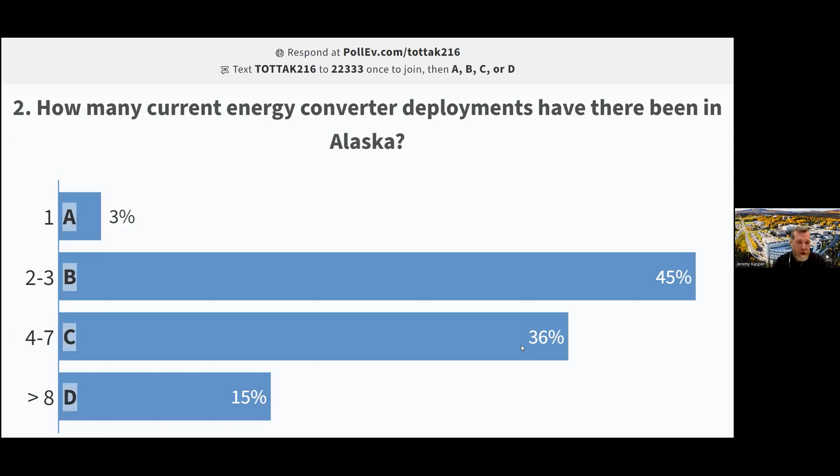In this panel, we'll hear about the resource in Cook Inlet, which is kind of the big elephant in the room, and what some of the challenges are. We'll learn about upcoming technologies that UAF is working on along with our partners in the private sector, and hear about how to potentially assess the suitability of sites on the Kuskokwim River using pretty limited information. As a reminder, during the session, questions can be submitted via the chat box, and we'll address those as best we can during the Q&A following the panel.

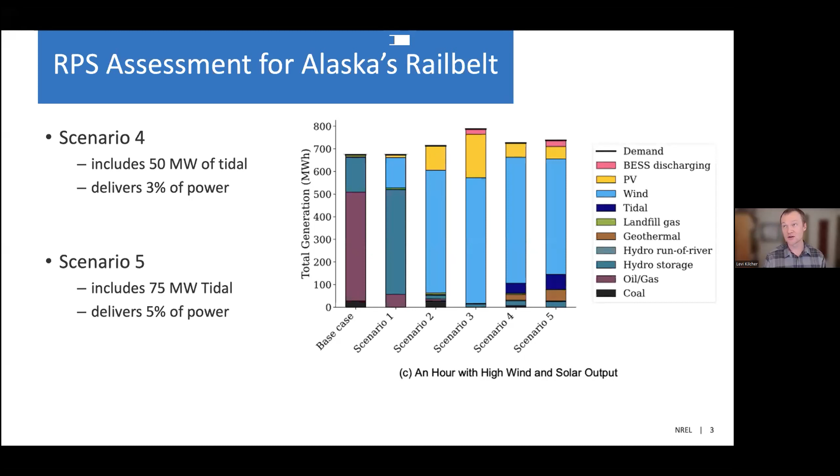They send out acoustic pings and they listen for the Doppler shift, the echo off of particles in the water column. Based on the shift in the frequency that these things hear, they're able to measure the velocity of the water throughout the water column. They're totally cool things. I could go on and on about them, but basically these are the instruments that allow us to measure the velocity in the water column.

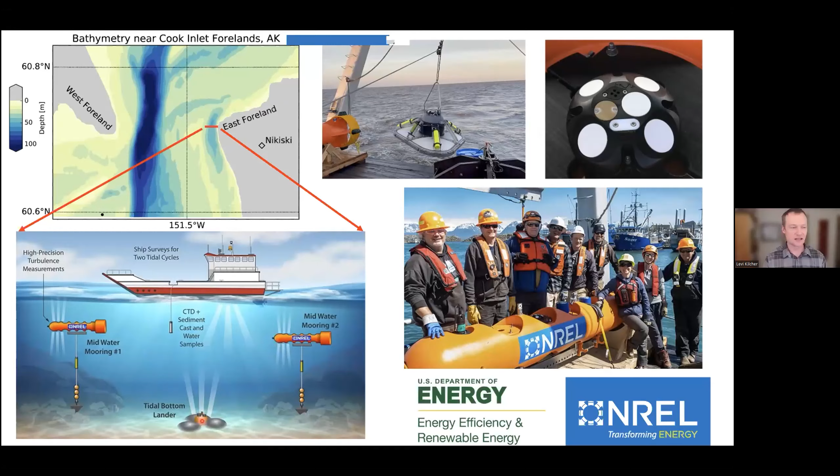So here's just a really quick overview of the data that we collected. The plot in the upper left indicates the depth average currents, indicated by those red arrows.

So this is basically during peak flood, and you're seeing currents between 2 and 3 meters per second flooding to the north. The orange dots indicate the location of the moorings, and the green triangle is the bottom lander. The bottom panel shows you the vertical structure of the currents across that channel. Red and dark red indicates strong currents to the north.

The Q is a volume flux estimate, so that's like the total volume of water that's moving through here. That's really important for calculating total power that you could generate at this site. And then the tidal amplitude plot is there. The blue line shows when we made these measurements.

So this transect was made just a little bit before high tide. That's when the peak flood currents occur. And then as we step forward in time to the next transect, we're a little bit just almost on top of high tide. You see the currents are weakening a little bit.

And then as you step forward in time again, the currents are becoming much weaker just a little bit after high tide. About 40 minutes after high tide is when we actually see the slack current condition. Stepping forward again, now the currents are starting to reverse to the south, starting to ebb out of the inlet. And then a little bit as you approach low tide, you see the peak ebb currents.

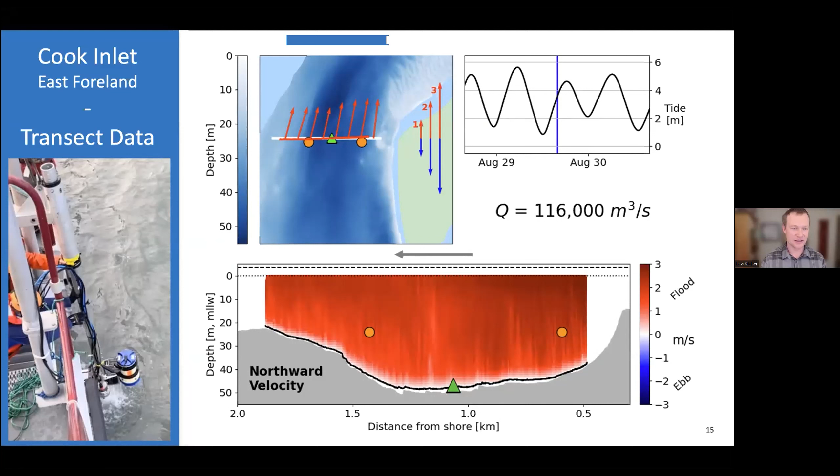These volume fluxes, these 3 meter per second currents that we're seeing are really premium tidal energy resource. So basically we are seeing the really energetic resource that we had hoped and expected to see at this site, and I think it's really promising for tidal energy development at this site.

This panel shows the data that we got off of the bottom lander. The top panel shows the tidal elevation, and you can see we have 2 months of data. This is just a totally phenomenal data set. The currents, especially during spring tides, are well over 3 meters per second.

And then the bottom panel shows some of the turbulence data that we were able to collect. Turbulence is really important for designing these turbines, because we learned in the wind industry that in the 90s especially, turbines were breaking down earlier than they had expected. And they figured out that turbulence, basically shaking the turbines, was causing those early failures. So they went through a process of redesigning them to make them more robust. We're working on leveraging that experience by measuring turbulence early on, so that we can give that to the technology developers, so they can design their technologies to account for turbulence, so we don't have to learn that lesson the hard way later on. That's a big piece of what we're doing here with these measurements.

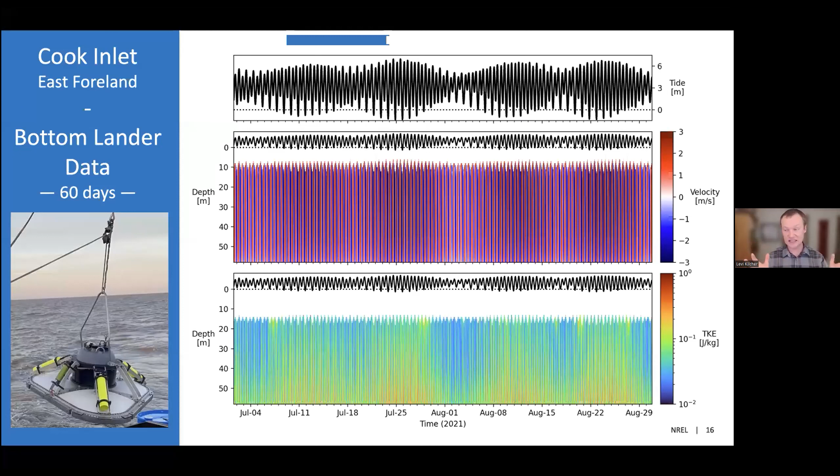And here's a zoom in. This 60-day view is kind of hard to actually see what's going on, so I'll zoom in here. We now have the depth averaged currents in this upper panel in red and blue. Again, you're seeing the depth average currents, especially during spring tides in the flood direction, over 3 meters per second. You can see the vertical structure of the currents here, and then the turbulence again on the bottom. Those turbulence levels, especially near the bottom, are really intense.

If we look at this in a depth averaged sense, sorry about that, in a time average sense for different levels of flood and ebb. Red lines are for flood, blue lines are for ebb, and these gray lighter lines are weaker current conditions. But basically what you see here is that the strongest flood currents are well over 3 meters per second, and the ebb currents are well over 2.5 meters per second, approaching 3 meters per second.

And then if you calculate that in terms of power, there's a cubic relationship between the power you get out of these currents and the current speed. So you see those strong floods really provide a lot of power. You're seeing almost 25 kilowatts per square meter of tidal energy flux at this site.

The last thing is this turbulence intensity plot. This is a metric that we use just as a basic understanding of turbulence at these sites. It's really low, especially above 20 meters from the bottom. So above 40 meters depth, the turbulence is all below 10%. That's really good—in the wind industry, they frequently see turbulence levels of 15%.

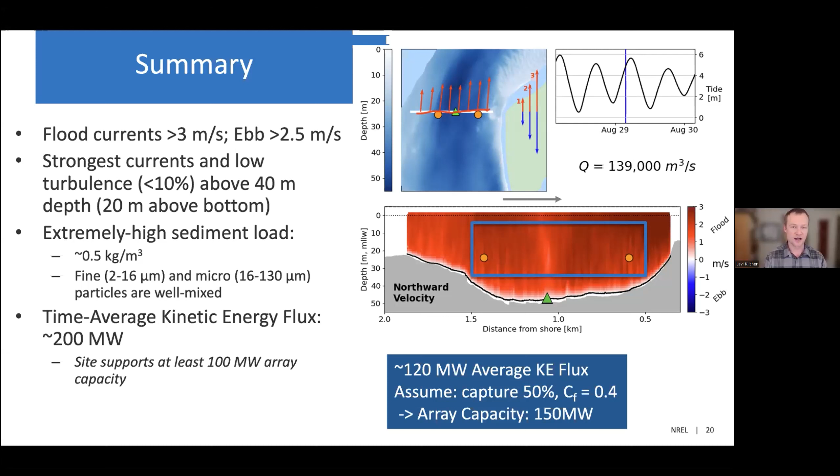And so as time goes on, the idea would be that you would actually build it out over there.

I just wanted to make one comment here on how long it takes for these technologies to become commercial. It took the wind energy industry 30 years to get from some of the early days in the 80s to where they are now. I guess it's been 40 years now. But you started to see those commercial projects in the early 2000s.

I don't want to speculate too much on where we're at, but I think, in my opinion, we're still on the left half of this plot. So we've still got 5 to 10 years at least before you see tidal energy projects delivering power competitive with other forms of generation. And a lot of that, in my opinion, has to do with demonstrating that the technologies can operate reliably for long periods of time, and also just doing the R&D that drives the costs of these technologies down.

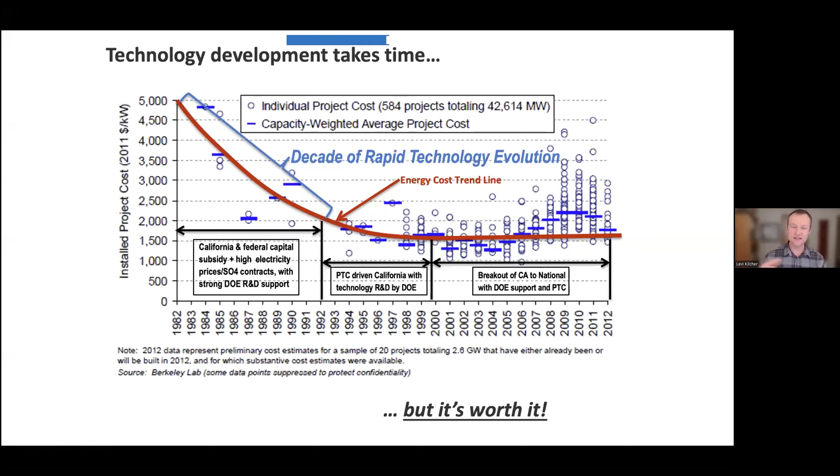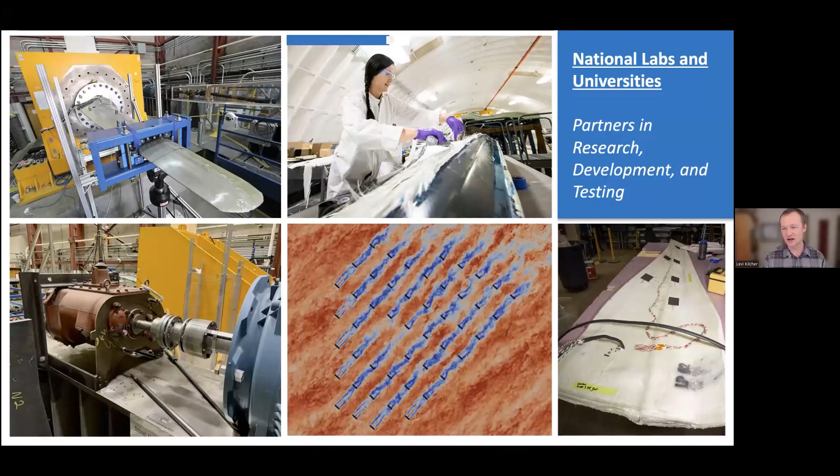One thing I think is really important as you're doing that is to involve the research community, because from what I've seen, any project developer is often so focused on getting their project in the water and making sure it's online and working, that sometimes they overlook collecting all the data that's necessary, whether that's environmental monitoring data or mechanical engineering or electrical engineering data that's needed to accelerate the technology development and the R&D pipeline. I think the labs and universities are great partners to support that work.

So that's all I've got. Thanks for your time, and I'm looking forward to hearing from the rest of the panel.

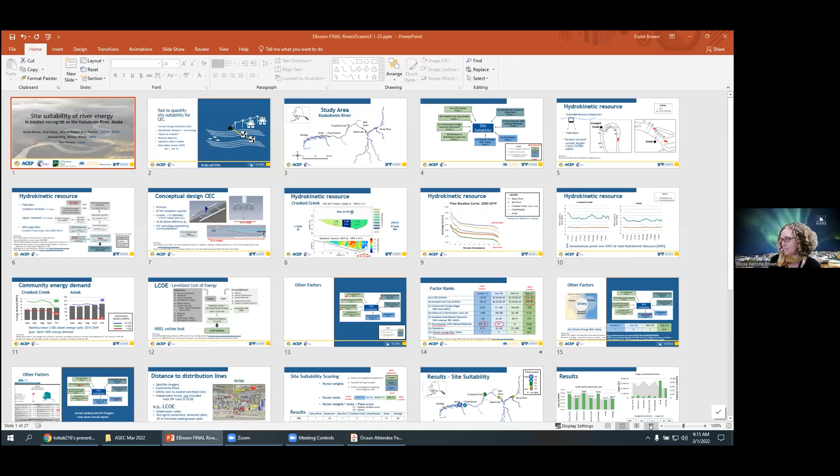Today I will present our recent work on site suitability of river energy in isolated microgrids on the Kuskokwim River, Alaska. This is a collaborative project with authors from the Alaska Center for Energy and Power at the Pacific Marine Energy Center at UAF, Alaska Pacific University, and the University of Alaska Anchorage.

The idea for this project came from Melanie Wilson, who did her master's project at APU, and several of us were on her committee. We incorporated field measurements that were part of a statewide resource assessment of hydrokinetic river energy resources by Tom Ravens to come up with a tool to quantify site suitability for current energy converters, or CEC. Thank you, Jeremy, for explaining that already.

So on the one hand, we looked at the hydrokinetic resource—how much river energy is there. But then what other factors are there to consider? There are social, environmental, and economic constraints, and that's what's meant by practical resource. We addressed some of those and applied our method to sites in Alaska.

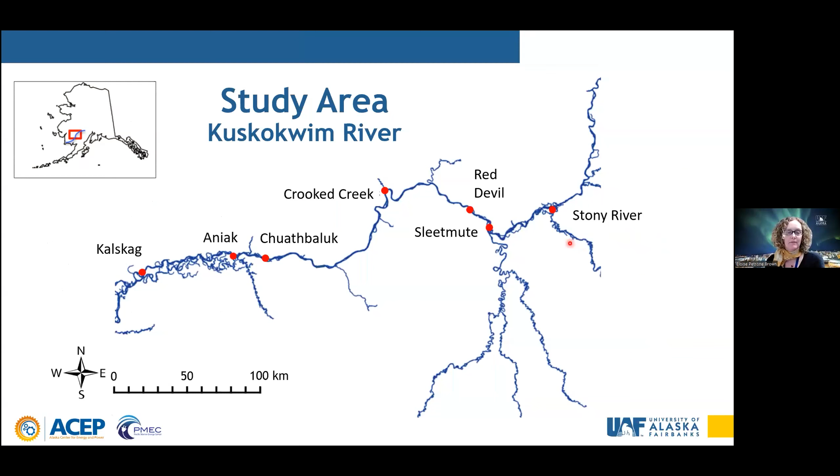This is our study area on the Kuskokwim River, in southwestern Alaska, and the 7 communities we selected. The furthest upstream was Stony River, and the furthest downstream was Kalskag.

As part of a statewide resource assessment, transects were surveyed at all of our locations, and thanks to Levi for explaining how ADCPs work. Basically, a transect is like a cross section of the river. It lets you see what the flow looks like—it's a snapshot in time at that one moment.

There were multiple transects at each site surveyed with ADCPs. As part of this study, you can also see our recommended location for a current energy converter at each site—that's what the blue star is. I'm showing a couple examples from Crooked Creek and Aniak. We have a fair amount of data, so I'm going to highlight just a few examples rather than go into everything given the time we have today.

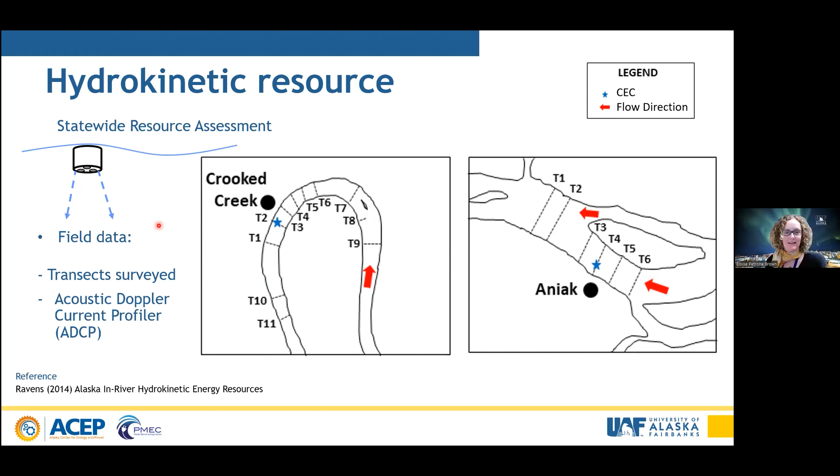Now, this slide I put up for the engineers in the audience. I'm not going to go into great detail on the equations. The short version you need to understand is that there are 3 main time periods.

The field data—the transects and the physical measurements of channel geometry—where snapshots in time were taken over the space of a day or two. Also part of the field data, hobo pressure sensors were deployed for anywhere from 2 to 8 weeks, depending on the location. So we captured discharge over one summer during that part of the field work.

The third time frame is the USGS gauge maintained at Crooked Creek. We were able to get 20 years of data, and relate that back by inputting our discharge from the transects and our longer-term discharge from the pressure sensors. We were able to back out what a typical open water season looks like over 20 years at each of the sites. So we start with discharge, convert it to velocity, and the end goal is to back out power.

That is how we calculate our hydrokinetic resource over the whole open water season, in megawatt hours over 4.5 months. The only other thing I want to mention is Manning's roughness—that's a way of describing the friction the water feels at the bottom of the river. We were able to tune our HEC-RAS model for each site.

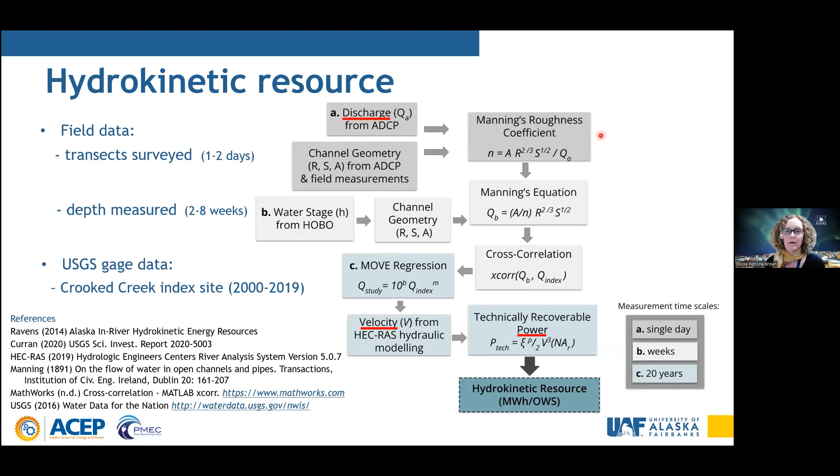Let me show you what that looks like in a second.

In order to be able to back out power, we had to choose a current energy converter, because you need these parameters to go into the equation for technically recoverable power. So we chose this conceptual design current energy converter that Previsic described in his 2008 EPRI report.

It's a floating style current energy converter. It's on pontoons. It's got a 47 kilowatt nameplate capacity, and it has 4 rotors with 2 meter diameter, each with a swept area of 3.14 meters squared. Its device efficiency is 34.4%. Those are the 3 parameters you need in this equation in order to back out power, and those numbers have to come from a manufacturer.

This one is 10 meters wide and 50 meters in length, and that goes all the way to the tip of the mooring. We recognize this is a conceptual design current energy converter, and that technology is approaching commercialization. So it was our intention that our methodology was transparent enough that a community could use their own cost data or manufacturer, or even their own weighting, to figure out what might work in their situation.

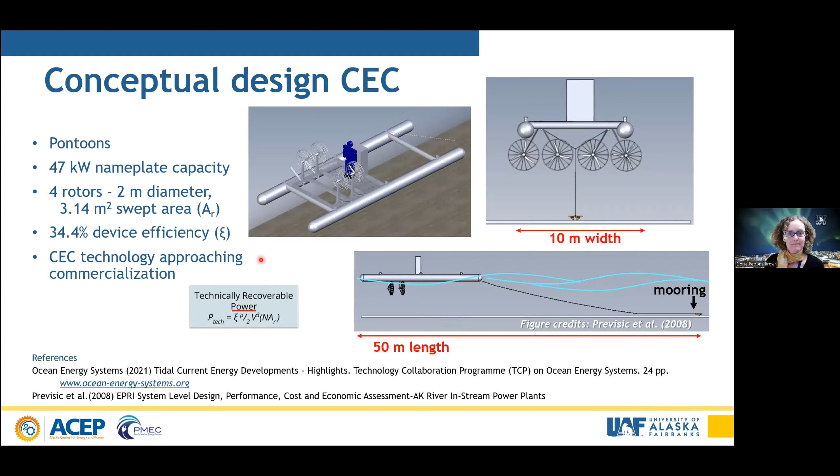Here's an example of what our transect data look like. At the bottom plot, you have your measured transect. This is a cross section of the river, just to orient yourself. If you're looking downstream, right bank is to the northwest on your right, and left bank is towards the southeast.

So town is on the right bank here, and flow is going into the page, towards the southwest. This is at Crooked Creek. One interesting thing I wanted to point out is that this is one of the towns where the channel is on the same side as town. When I get into the cabling distances later, that's important—it's going to bring their costs down a lot.

On the lower plot, you have flow speed in meters per second against the depth of the transect, and the same on the upper plot. This shows that the measured transect matches very well with our model transect, which means we were happy with how we had tuned our HEC-RAS model for the future models.

The other interesting thing in this plot is you can see the center channel has 2 meters per second velocity, and it's not exactly in the deepest part of the channel, which is called the Thalweg. I'm bringing this up because we need to recognize that these braided riverbeds do migrate—the channels don't always stay the same. So it's likely that the location of the current energy converter might change from year to year slightly as the channel is adjusted.

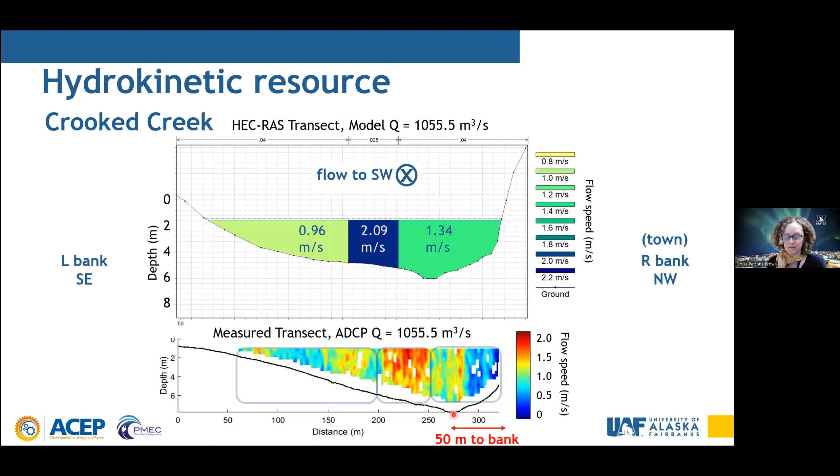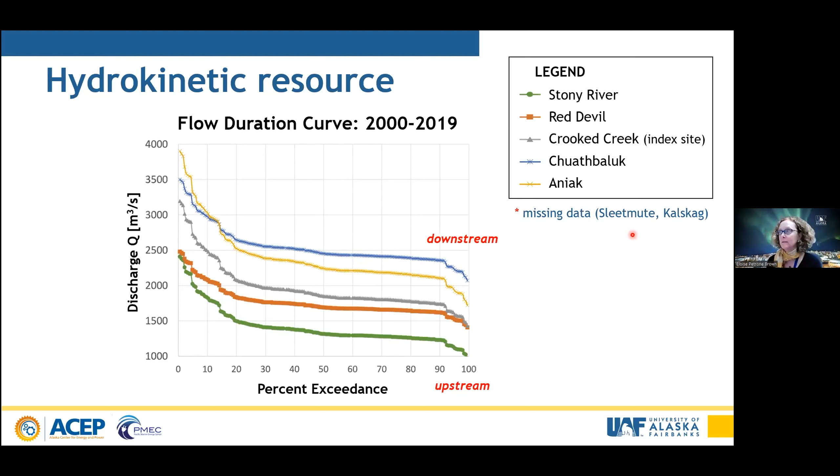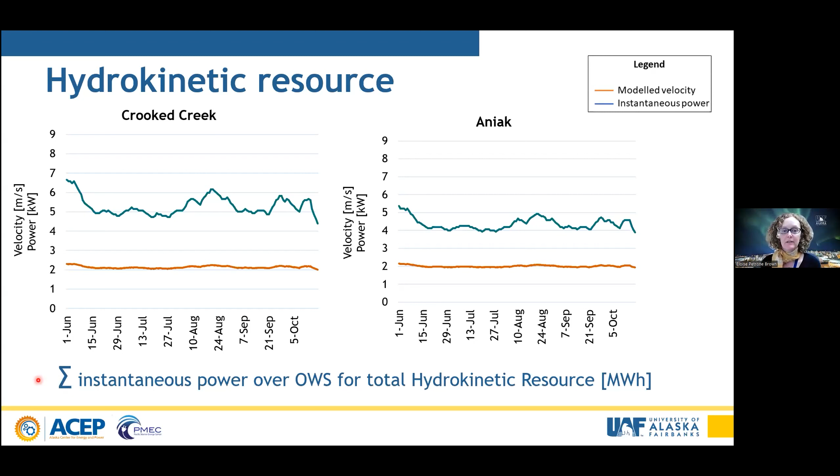This is what the time series of velocity, modeled velocity, and instantaneous power look like. The orange line is modeled velocity in meters per second, and the blue line is instantaneous power in kilowatts. This is over the open water season from June 1st to mid-October at 2 sites, for example at Crooked Creek and Aniak. What we did with this instantaneous power was sum it over the entire open water season to obtain the total hydrokinetic resource.

Once we have the total hydrokinetic resource, we can start looking at community energy demand and figuring out how many current energy converters would be needed at each location.

What you're looking at here, the gray bars are the monthly mean plus standard deviation of diesel energy used for the 5 years prior to the present. This is energy demand in megawatt hours for the 5 months of the open water season at Crooked Creek and at Aniak. I wanted to point out the y-axis scales are orders of magnitude different: Crooked Creek only goes up to 35 megawatt hours, but Aniak is a much larger community, so its scale goes up to 300 megawatt hours.

What this shows is that one current energy converter at Crooked Creek is able to meet 72% of the demand during the summer months. Since our goal was to meet 100% of the energy demand at each community, at this site we recommended 2 current energy converters, which would produce 145% of the current demand.

Aniak, which is a larger community, we found that 1 current energy converter would only meet about 6% of the community's demand. To meet 100%, or actually 98% was the closest we could get, at this site we would recommend an array of current energy converters with 4 different moorings and 4 current energy converters on each, for a total of 16 current energy converters.

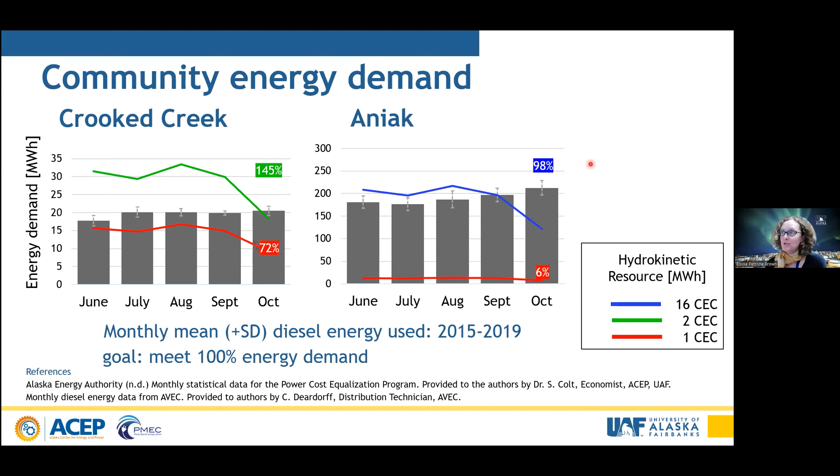So that's what we did at each site to figure out the number of current energy converters required. Once we knew how many were required, we could start looking at costs. To calculate the levelized cost of energy, we used the National Renewable Energy Laboratory online tool.

The website is here, it's really easy to use, and we spent quite a bit of time looking at the different costs. So let me change... oops, I'm having a hard time, I lost my mouse. Okay.

Looking at the capital costs on the upper left, this first section associated with manufacturing came directly out of the Previsic EPRI report from 2008, which we converted to current currency. The next part of the capital costs, the debris diverter and on-site assembly, those costs we got from our experiences at the Tanana River test site operated by UAF.

I wanted to point out that our capital costs did include the cost of a debris diverter—I won't go into great detail since Ben should have slides explaining that in his next talk. I also contacted many different manufacturers to get quotes for shipping, airfare, and the various underwater and underground cabling and connection costs that go into microgrid connection.

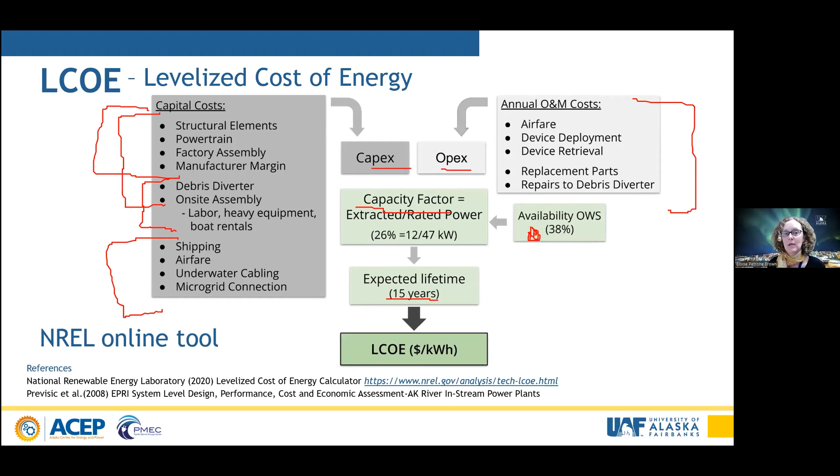Okay, let me go back to my laser pointer. So we've looked at the LCOE, the hydrokinetic resource, and the community energy demand. Now I'm going to explain some of the other factors.

If you recall, let me go back a slide—the factors were weighted by importance, weighted with a 1, 2, or 3. Within factors, we also ranked them from high to lowest, where a score of 1 is the least suitable and a score of 4 is the most suitable. I just wanted to point out a couple examples.

For the LCOE, a site where the cost is low, so less than 30 cents per kilowatt hour, is where we're saying would be a suitable location. And a place where fuel is high, so greater than 50 cents, is also suitable, because if the fuel cost is already cheap, it doesn't make sense to replace it with an LCOE of renewable that's the same or more expensive.

I think I have an animation here. There it is. I also wanted to highlight, for the sensitive environmental considerations, we looked at locations where there's fish spawning or rearing habitat or wetlands. Anywhere with fish habitat was considered least suitable, and combined fish and wetland got the lowest score, whereas if there were no sensitive environments, they got the highest score. We used data from ADF&G and US Fish and Wildlife Service to obtain that environmental data.

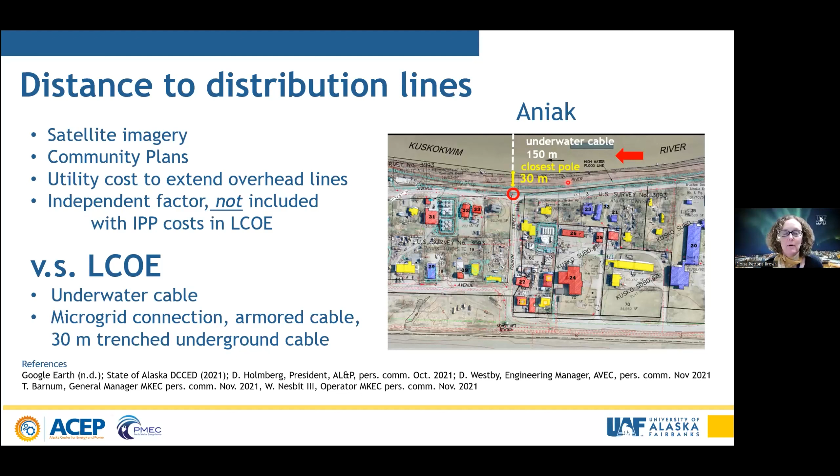I also wanted to show that the underwater cable distance was measured. Even though it's a separate factor not included in the LCOE, these cable costs, both the distribution lines and the underwater cable, ended up being fairly significant, and I think that contributed to how our results weighted out. The LCOE included both the cost of the underwater cable, calculated per meter, and the microgrid connection. We didn't distinguish for all of our sites; across the board, we took 30 meters as a combination of armored cable and buried underground cable in a trench. So this site essentially has zero distance, because that 30 meters to the closest pole is incorporated into our microgrid connection costs.

So if you remember our site suitability scoring, we take our factor weights weighted by importance from most important to least important, so the weights could be 1, 2, or 3. And then we took our factor ranks from least to most suitable, so for the ranks you could get a 1 to 4, and then we multiplied the factor weights by the ranks to get our final score. The total possible score was 72, and the lowest possible score was 18. Our final scores all ranged between about 40 and 50.

Our LCOE ranged from about 30 to 50 cents per kilowatt hour. And then here we have the number of current energy converters that we recommend. For most of the smaller communities with a lower energy demand, we recommended 1 or 2, and for the larger communities at Aniak and Kalskag, we recommended an array of multiple current energy converters.

I just want to point out on the slide, Sleetmute and Kalskag have missing hydrokinetic data, so take those two sites with a grain of salt. We are suggesting Sleetmute might use 2 current energy converters, purely based on the demand of the community since we don't have the hydro data. I wanted to still include an LCOE and look at the costs and distances for the site, but we don't have a final score for it. Same with Kalskag. Kalskag has about half the energy demand as Aniak, and that's why we recommended about half the number of current energy converters, but more data is needed to answer that for sure.

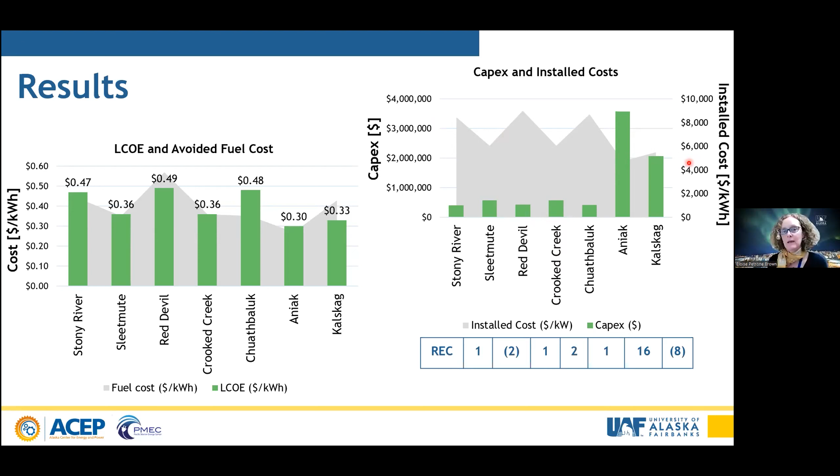So the other point I wanted to make on this figure was that although the initial investment was high, the installed cost, the cost per kilowatt, is reduced by the increased number of current energy converters.

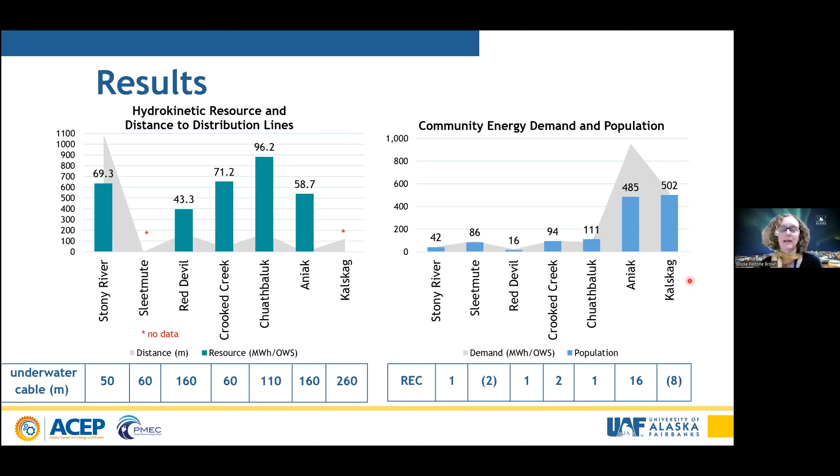So in conclusion, we presented a methodology to evaluate site suitability. We applied it to the Kuskokwim River. I think the LCOE results compared to avoided fuel costs show that current energy conversion is a potentially viable option at these communities. The main take-home message about our method is that it can be adjusted to suit your own needs. You could change the weighting or ranking of these factors if you felt we missed something, or that something was more important, and you could put in your own cost data into the LCOE to determine if your site is going to work or not.

A couple of things for future work we're looking at: some more targeted field data now that we've had a really detailed look at where the channels are relative to where the power infrastructure is. There's a few sites where we'd like to go back and do more targeted field data. We've also been in discussions with ORPC about looking at winter ice and under-ice flow measurements to try and get at that winter season.

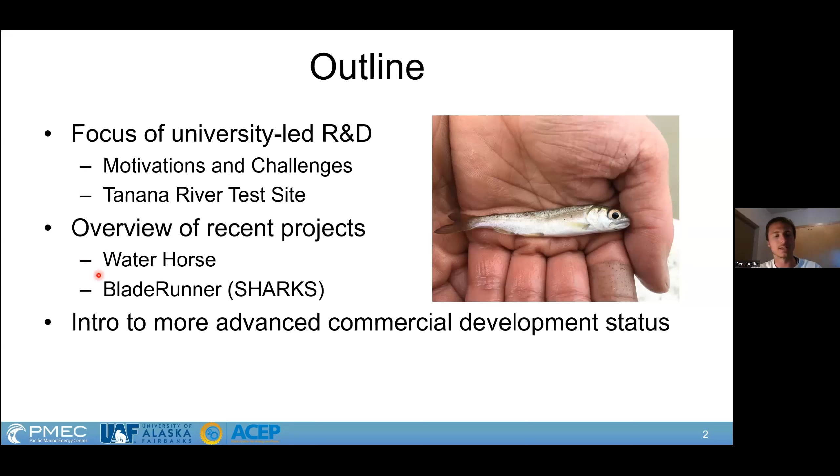In this presentation, I'll touch briefly on our focus as a university and our motivations for hydrokinetic research as it pertains to Alaska, what the motivations and challenges are there, and give an overview of our test site on the Tanana River. Then I'll talk about two of our recent projects that are sort of outliers in the field of technologies being developed. At the very end, I'll give a list of other technologies that interested folks might want to look into.

So, motivation: at ACEP, our motivation is really to try and advance hydrokinetic energy to the point where it's valuable to Alaskans and can provide power to Alaskan communities. Some of the challenges are that these devices are generally small scale, which means their cost per kilowatt tends to be higher. A lot of commercially developed systems are rated at say 3 meters per second, like Levi was saying, but we don't really have rivers that are 3 meters per second. Because it's a cubic relationship, you may only get 30% of the output of the device on an actual river.

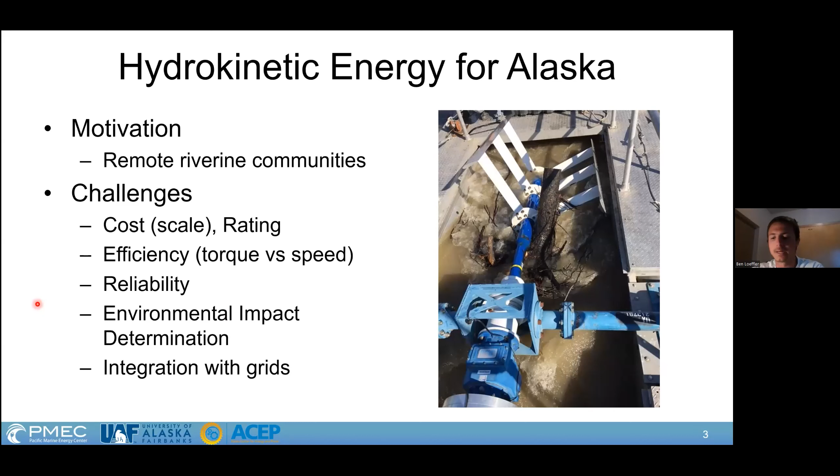So a little overview of our test site on the Tanana River in Nenana. It's about 55 miles southwest of Fairbanks along the Parks Highway, so it's pretty accessible, easy to get equipment in and out. We have open water May to October. The velocity has quite a large range on this stretch of the river—in the fall, if it hasn't been raining, we'll get down to 1.2, 1.3 meters per second. If we have high water, lots of rain and sun on the mountains and glaciers in June or July, we might get up to 3 meters per second.

Generally, we think of it as a 1.8 to 2 meter per second resource, which is consistent with what Eloise was showing for the Kuskokwim and similar for the Yukon as well. You can expect a depth of 6 meters, but obviously it changes with the river level and with the channel movements, and so 10 meters is certainly present in some places.

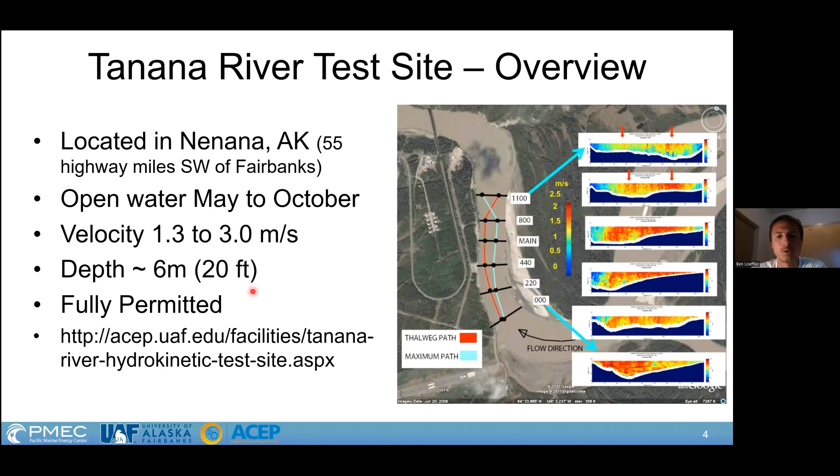This stretch of river is fully permitted, and we keep those permits current year to year, so it's pretty easy to get technology into the water on a fairly short timeline. There's no onerous permitting to speak of.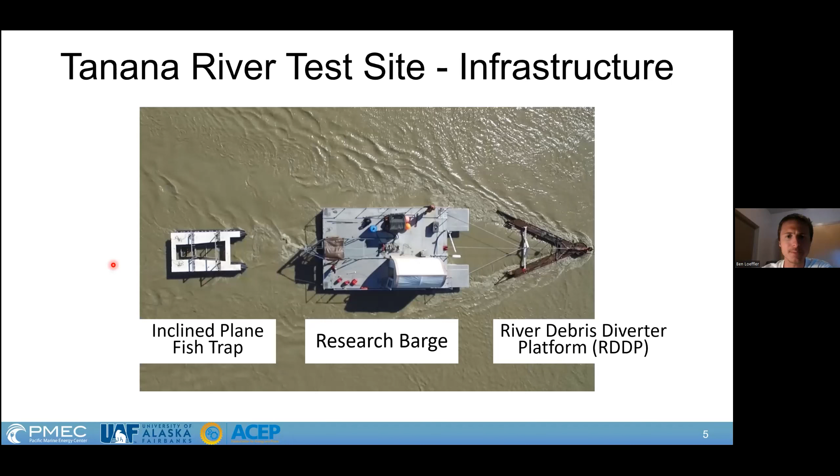Now we'll get into two particular systems that are kind of in the R&D phases that we've been working on here at ACEP. The first is called the Water Horse, and it's a galloping current energy system. Rather than rotating a turbine due to lift or drag on an airfoil, this system oscillates up and down, and I'll play a video.

These weird aluminum shapes on the left are called bluff bodies, and the flat face that's down on the deck is actually inserted perpendicular to the flow. So the river flows directly into the flat face, and then vortices trip over the upper and lower edges of this and create an alternating lift. This system is based on intellectual property from Renerge Incorporated.

We tested this first version in 2020, and then tested an updated system this past summer, 2021. The thinking with this approach is that these type of systems are expected to be very low efficiency compared to a turbine, but if they're a lot cheaper and more robust, that levelized cost of energy, LCOE, that Elle talked about, could be competitive. So if you're half as efficient but also half as expensive, you're the same cost per kilowatt hour.

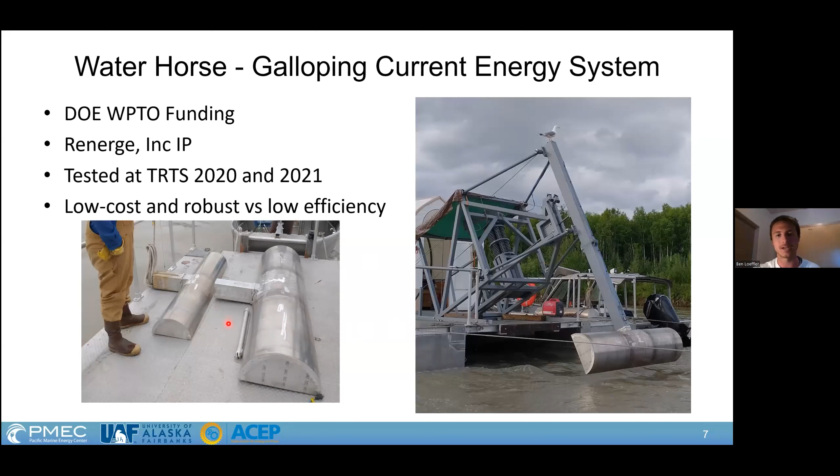Here's some background, an image of the vortex shedding. This is a flow visualization for a circular bluff body, and Renerge found that a flat face accentuated the vortex shedding effect. Essentially, as the velocity increases, these vortices—the blue are vortices tripping off the top and the red are tripping off the bottom—you see how these four panels show increasing velocity, and you get more complicated vortex streets or patterns that generate an alternating lift force, similar to how an airfoil works, but due to pressure differentials from the vortex.

The scientific analysis shows the shedding changes with the Reynolds number, which is proportional to the velocity and to the diameter of the bluff body. You can scale your diameter to your anticipated velocity to arrive at the Reynolds number you want. The shedding frequency is described by the Strouhal number, where the frequency is inversely proportional to the diameter, and this ratio over the velocity tends to be about 0.2.

So what you do is you design your oscillator system so that it's like a mass spring damper, and the mass, the spring stiffness, and the damping from your generator are sort of matched to the vortex shedding frequency. Some of the best research published has been on the Vivace device out of the University of Michigan, so you can look that up.

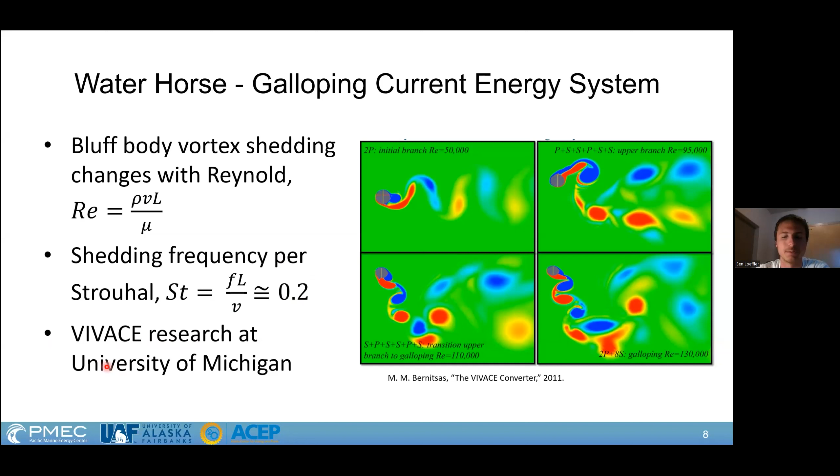So here I'm going to play a video of our floating platform deployed system. One big thing to note, after you take in how the device is moving, is to look at how the barge is moving as well. I'll talk about that afterwards.

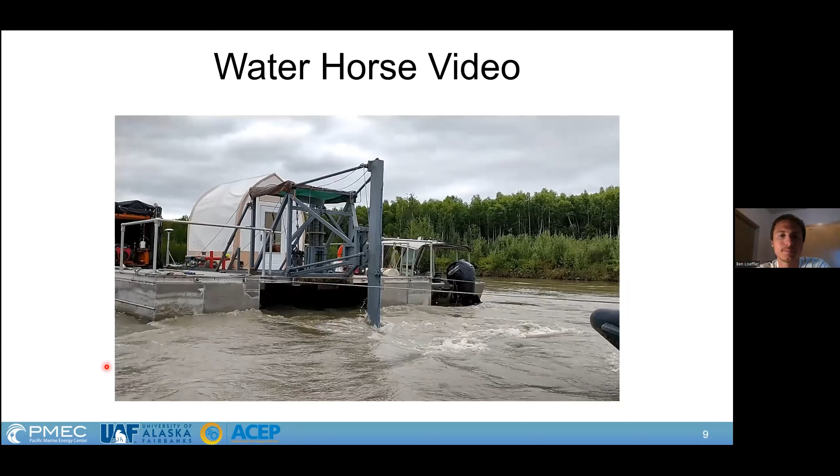So this vertical beam here is the support. The bluff body is roughly 3 to 6 feet underwater. There's a chain connected through here that ultimately compresses this spring pack and also connects to a power takeoff system that spins the generator. This was our version 1 device, and here are the big takeaways from that.

The data collected that summer: here's the electrical power output. This top one, we were implementing a Sprague clutch to mechanically rectify the generator rotation, so the power comes in these pulses with each stroke of the oscillator. Then we actually removed the mechanical rectifier, the Sprague clutch, and used an electrical rectifier instead, so we were able to double the number of pulses and improve our efficiency.

Over here on the right is velocity on the x-axis. On the days we were testing, we were between 1.8 and 2 meters per second. Our water-to-wire efficiency, so the power present in the water, in kilowatts per square meter, compared to the electrical power that actually came out the other side, our electrical output was anywhere from under 1% to almost 3% of the power available in the water.

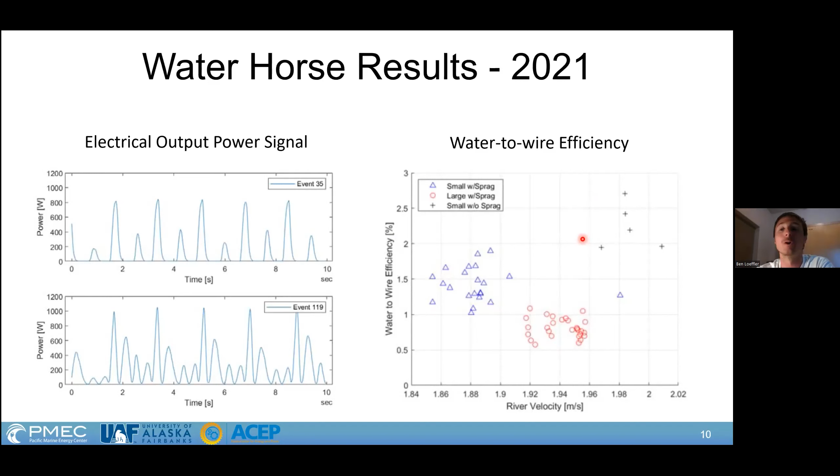So very low efficiency. A good turbine will get you up into the 40 to 50% range, which would be a very high performance turbine. So obviously quite low, and we're clearly not 1/30th the cost of a turbine, so this was not going to be a competitive efficiency.

Out of that, for our year 2 device, we implemented a power signal conditioning system with off-the-shelf components, essentially rectifiers, and then a DC charge controller to provide a constant output voltage to charge a battery bank, which could then run an inverter to the grid. There's a lot of instrumentation cables going everywhere for all the data collection of power, current, and voltage at all different stages. I don't have good imagery or video of our testing this summer that I was able to pull in.

But we saw significantly improved efficiency at much lower velocities. We were testing between 1.2 and 1.8. These squares and triangles are the representative efficiencies from 2020. This isn't fully processed data, but these are moving average data points, and we were operating in the range of 6 to 8% efficiency—perhaps a 2 to 4 fold improvement in efficiency.

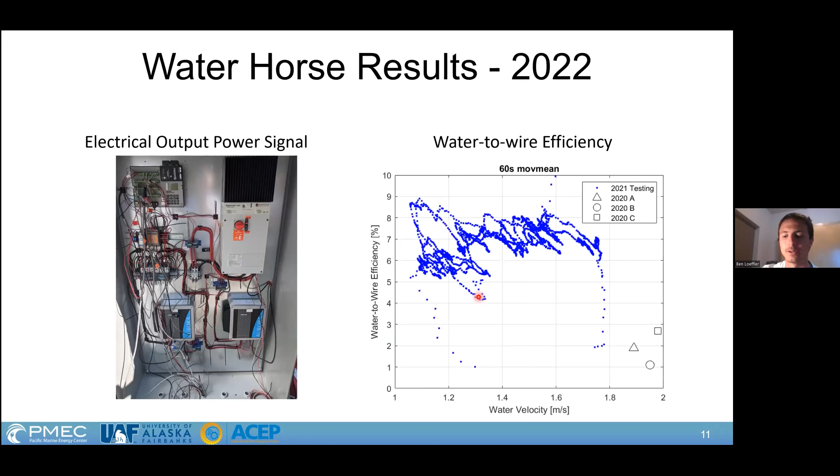That's the kind of thing we're trying to achieve at the university level: learning about the details of the technology and trying to make incremental improvements. So the second device, or second project—this one is ongoing currently. It just started this past July, and we ran quickly to get a device in the water in September.

This is the Sharks program run by ARPA-E, which is the Department of Energy's Advanced Research agency—I forget the exact acronym—but their mission is to advance high potential, high impact energy technologies that are too early for private sector investment. We partnered on this project with a startup company, Blade Runner, because we thought they had a really interesting design that could be really well suited for Alaska.

The Sharks program focused on co-design: instead of sequentially designing your system from one end to the other, thinking about all parts of your system holistically and designing them together. And then controls co-design—what can you do with controls to lessen the cost of other aspects of your mechanical design. It's suitable for tidal and river, a current energy converter. Sharks focused on what they called a metric space, a way of normalizing the LCOE into some constituent parts.

So they evaluated the technologies based on their water-to-wire efficiency, which they called M1, and their structural efficiency, M2, which measures how much material cost there is per swept area of rotor. If you multiply M1 times M2, you get the cost per kilowatt hour produced for a given resource, and then you add the operating expense, meaning how much O&M costs are layered on top to get your LCOE.

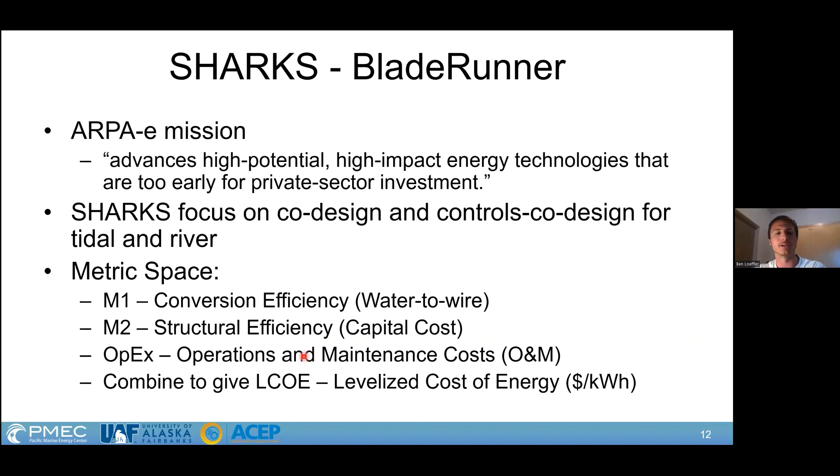The big thing here was actually that M2 metric. In this system, everything is in tension, so there are no cantilevered loads and no need for big, strong steel members. The mooring line comes into a simple steel frame in the generator housing, and there's a thrust bearing that carries the load from the torsional cable, which is in tension. The drag on the rotor keeps everything pulled straight.

These are designed to be modular, roughly 2.5 kilowatt output for a 2 meter per second river. Because of that single point mooring, we're going to explore deploying them from shore without any boats, basically using a boom arm to swing it out into the current.

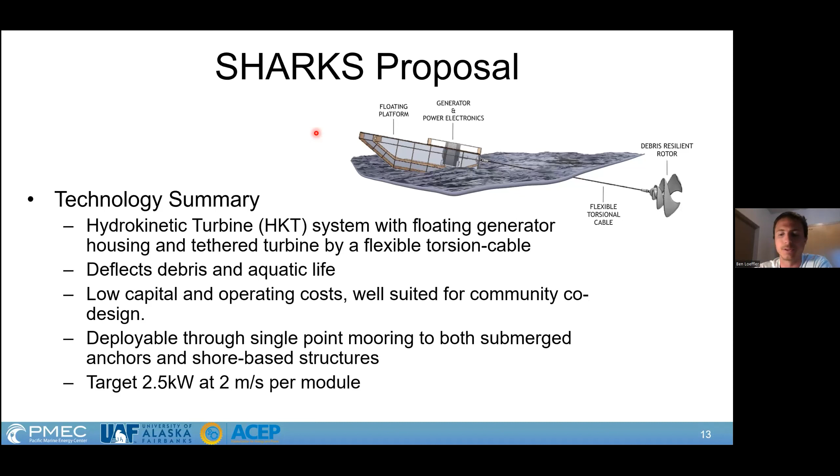This is a permanent magnet machine, but another component of this project is we've partnered with a startup called C-Motive Technologies, who have an electrostatic generator that should be highly efficient at 100-200 RPM speed range. As I mentioned at the beginning, that electrostatic generator offers the potential to directly couple a 100 or 200 RPM large diameter rotor directly to a generator that's highly efficient.

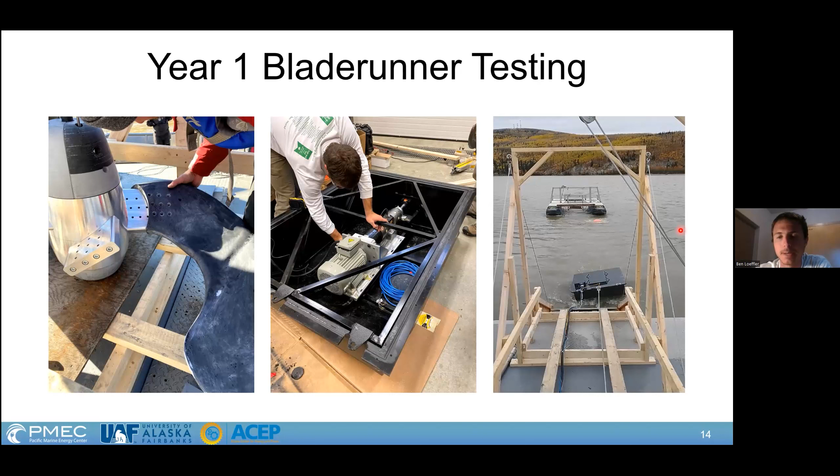But unlike the water horse, this system is pretty benign. This block on the right shows a video of it operating. The generator housing is floating in the water, and we've got a buoy off the tail end of the rotor. The rotor is fully submerged, the buoy rotating, and the system is at work producing power, again with the fishing barge downstream sampling for fish.

This is an ongoing project, and we have 2 more summers of field testing with iterative design development. This first year of testing produced roughly 30% efficiency, 28% I think, water to wire, and that allowed them to validate their computational fluid dynamic modeling. They're obviously using advanced computer software to design their blade geometries.

Here's some pretty pictures from Bladerunner, and they're working with a company called Moshman Research to develop their blade shapes, looking at blade-to-blade interactions and detailed shape morphing to optimize rotor performance. This summer we'll do our first shore-based test deployment with a single modular unit, and hopefully an array deployment from shore next summer.

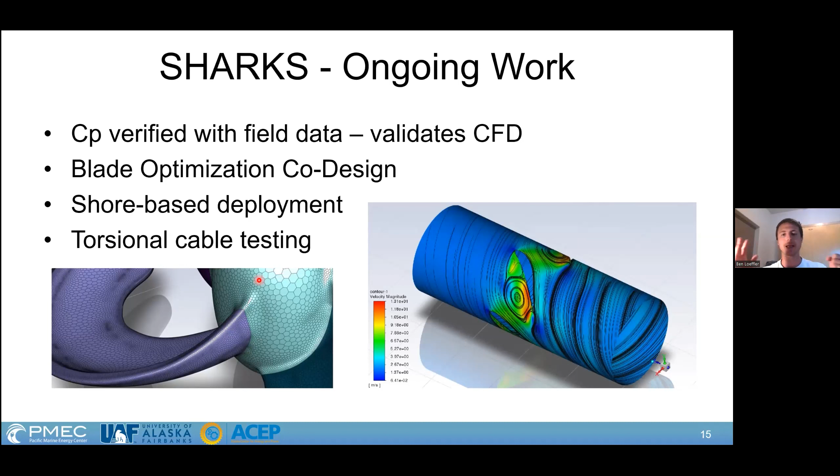We're also doing some testing of that torsional cable, because we're operating at torque levels that haven't been operated at with a free end that's not fixed. We have to balance that drag force with the torque to prevent the cable from kinking.

This is my last slide, just a wet-your-whistle overview. I'm not an encyclopedia of current energy converter technologies out there, but here are some things to look into if you're interested in learning more. There have been some successful pilot sites in the United States.

You'll hear more about the ORPC roughly 40 kilowatt scale system in Igiugig. Verdant Power also has a roughly 100 kilowatt scale system in the East River in New York. There are smaller scale commercial offerings too—a few that came to mind readily when making the slide. New Energy is the system that went in Ruby and Eagle.

In that first picture, these vertical axis cross flow systems seem to be prone to debris accumulation, but you could have a site where debris is not a problem, where that might be suitable. Smart Hydro has an interesting axial flow system that has a floating platform and a debris screen.

I've seen similar systems on the Rhine River in Germany being tested. And in the US, Hydro Green Energy seems to be having some success putting hydrokinetic systems in hydroelectric dam spillways, recovering energy from the flow of water out the spillway. And there are a number of development and testing locations, none of them river.

We're really the only show on river testing, but a lot of systems have gone in at EMEC, the European Marine Energy Center in Scotland, including very recently a 2 megawatt Orbital Marine system. I think Orbital is going to be talking in this workshop.

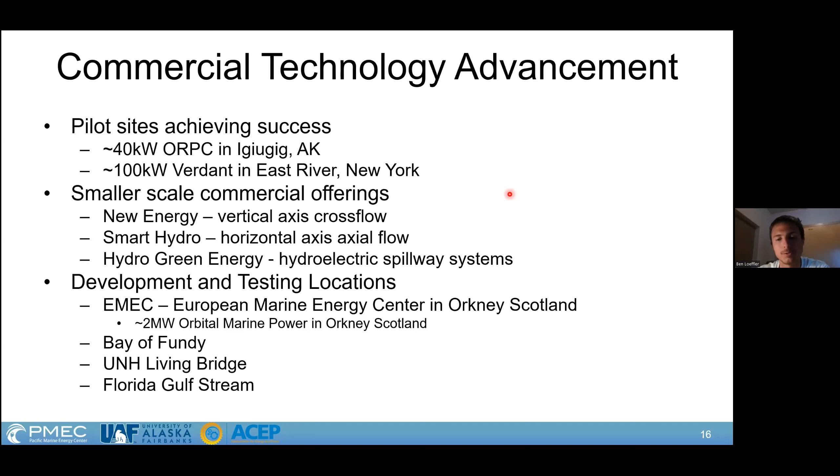A number of systems have been tested or attempted at the Bay of Fundy, off Nova Scotia, and you can look into the UNH Living Bridge. There's also a lot of research going on around the Florida Gulf Stream, so you could look into that as well.

And then a couple of acknowledgements. The Water Horse is funded by the Department of Energy, Water Power Technologies Office, with the award number shown. And SHARKS is being funded by the Advanced Research Projects Agency, ARPA-E, Department of Energy, with that award number there. That's it, I guess Shanna will handle all the questions. Thanks.

Thanks so much, Ben. Great to get some of the details about what's been going on up there. Okay, we have about 11 minutes here for questions now, and we have quite a list of questions that have come in from the audience members. Some are to specific panelists and some are to the group, so I think I'll start out with some that are maybe a little broader.

Eloise cited some pretty high costs, and there were questions around whether there are funding opportunities that might offset these costs, either from state or federal grants, or if there are ways that communities could collaborate on construction costs instead of each bearing the burden individually. Does anyone have any thoughts on that?

I would just say that the cost would absolutely come down if communities shared, because otherwise you're barging all this stuff upriver and doing our analysis for each individual community by itself. A lot of the cable and materials, the more you buy in bulk, the price goes down. So sharing like this would absolutely bring the cost down. I'll let someone else make suggestions on where to go for funding though.

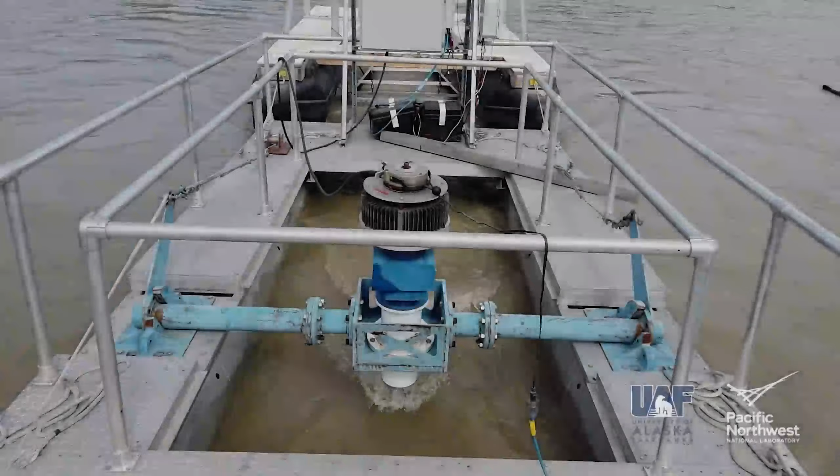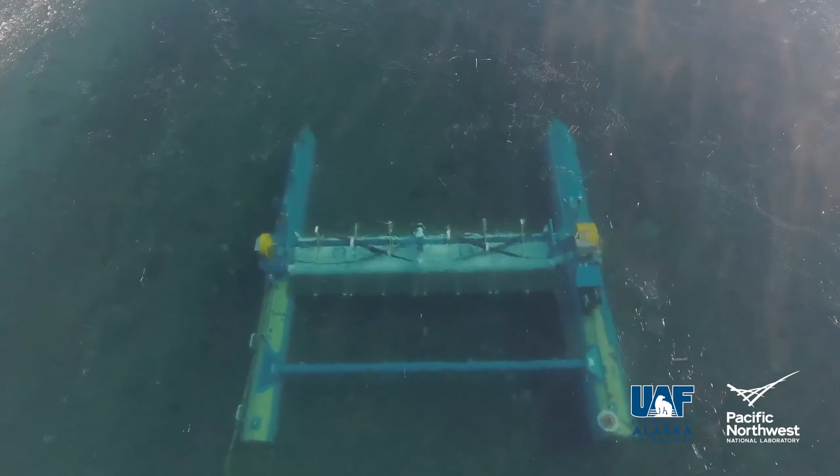Hydrokinetic turbines are devices you put in the water that typically spin, and the spinning motion produces electricity, but that also creates a risk of collision with fishes. I look at a variety of stressors, but my specialty is probably collision risk, which is the risk that animals have of interacting with some of these marine energy devices. We're going to go downstream first. And we are specifically trying to characterize the fish community that may interact with the turbine while it's in the water.

Six chums. So we care about all fishes, but some fish are used by humans more than others, and so salmon are the main species of interest. In a river like the Tanana, we have three species of salmon: king salmon, chum salmon, and coho salmon. This river can also include long-nosed suckers, lake chubs, a variety of whitefish species, burbot, which are also recreationally important, and pike as well. There's always a risk when you put something spinning in a river that it will have some sort of interaction with fishes, so we're trying to understand what risk a turbine may put fishes at.

Tanana River Test Site here in Nenana. We've been doing a lot of work on characterizing debris, hydrodynamics, so river velocity, and we've also been doing a lot of testing of infrastructure, new turbine architectures, new ways to capture the energy in the moving water. What the PNNL people are doing is trying to see if they can visualize king salmon smolts, which are about 8 to 10 centimeters long, swimming down to the ocean, using this acoustic camera. The way to ground truth or verify what they're seeing is by fishing behind their equipment or the beam of their equipment, and that's another purpose for the fishing equipment we use.

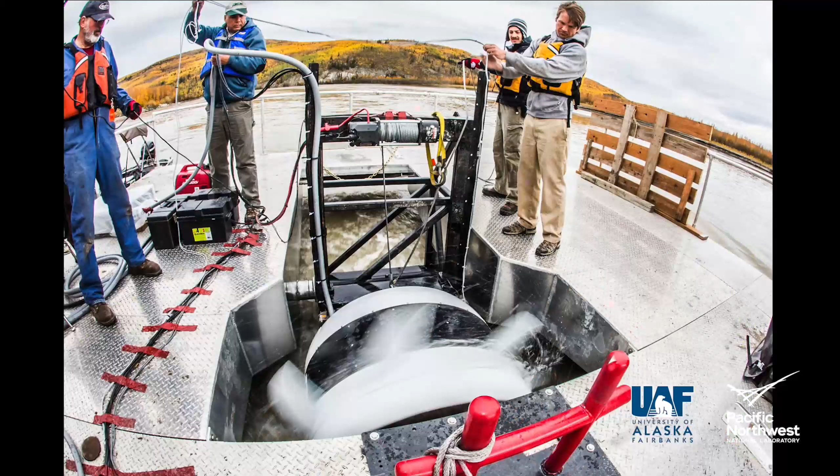Partnerships are important because hydrokinetics is an inherently interdisciplinary science. To have the expertise to cover all the aspects of it, you really need those kind of cross-disciplinary partnerships. It's really hard to get all those pieces together.

The benefits of this collaboration and the research associated with it, you could start at a very high level and discuss the benefits to the country as a whole: renewable energy developments to increase and diversify the portfolio of energy that we depend on.

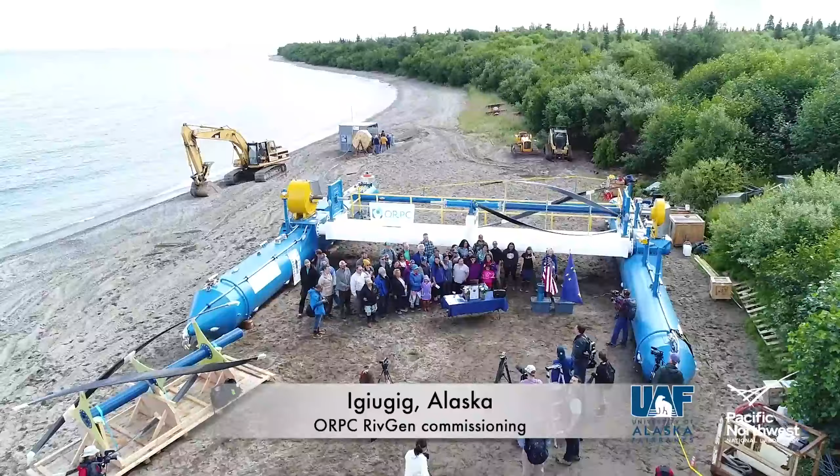I'm standing here on the banks of the Tanana River near the small town of Nenana, and there's advantages there. Everything from the power development that potentially could be used here, or similar development at other villages or small towns, as well as jobs that could be developed locally, as well as bringing in jobs from outside.

My name is Tim McManus. I'm the first chief, and it's a volunteer position. We've got about 200 people living here. Our school, you know, we've got the kids. We've got a boarding school that kids come from other villages and stay here. So I'm very excited about UAF and the collaboration with the Native Council on this project.

People have been asking me, what's that thing out in the river, Timmy? Who's fishing? To be able to learn about it and figure out what was going on was a big help.

We've been doing research in the Tanana River test site since 2010. As we build this knowledge base, it allows us to not start from scratch, and we can advance the field of clean energy in rivers.

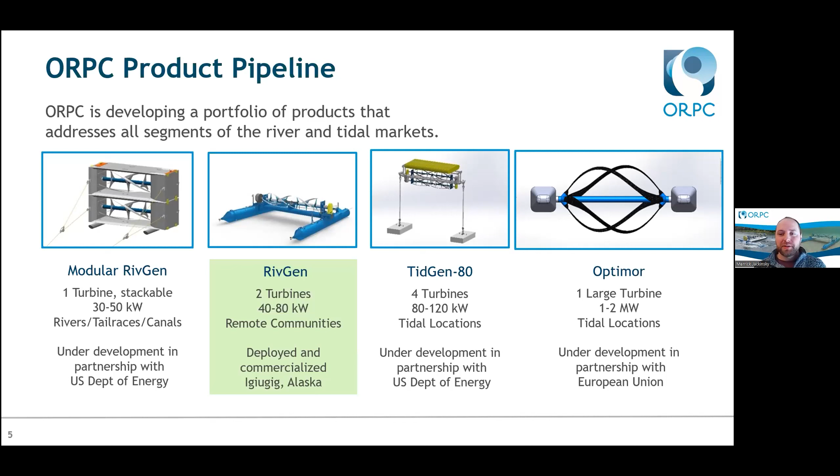We're also actively developing our TidGen. We're looking at some deployments for this in the coming years, particularly in Cook Inlet and in the Maine area. Lastly, our Optimor device is what we consider our megawatt scale device, which is still under development. We hope to have more information about that soon. It's primarily being developed overseas right now.

A little bit about our River Hydrokinetic device. This little box right here is what we call our commercialization package, if you will, with 1 or 2 RivGens that connect to a smart microgrid through a battery energy storage system or other energy storage system that works in concert with existing diesel generators.

The idea here is that we can provide a base load for the diesels, provide power to charge the battery energy storage system, especially in the summertime when we have excess flow. This also allows existing diesels to run at peak efficiency, so we don't have issues with wet stacking, and can start to combat that as well.

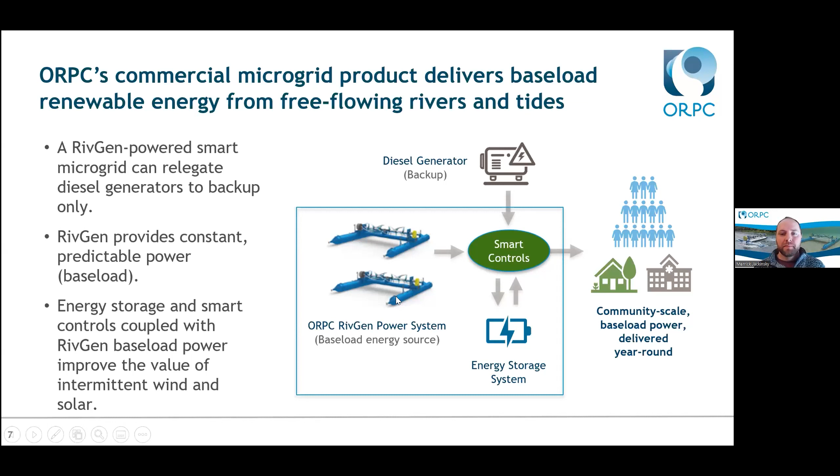Slide's not changing here. There we go.

Our RivGen that's installed in Igiugig is currently what we call a RivGen 2.1. It's rated at 40 kilowatts at 2.25 meters per second. It's a fairly large device, fitting on 2 flatbed trucks when it comes in. We actually haul it out there across Williamsport and into Lake Iliamna and barge it into place.

The first RivGen that was installed is currently out of the water for a teardown contract, so we have another RivGen in its place right now. After our teardown and rebuild project, we'll have 2 RivGens back in the water in Igiugig. We're looking forward to that deployment later this summer.

Just some quick highlights: the first one was in the water for 21 months and went through 2 frazil ice events. Pretty interesting seeing rocks the size of golf balls, or softballs I should say, being picked up and hurled into the turbine, and it being able to survive and still produce power on a regular basis for the village.

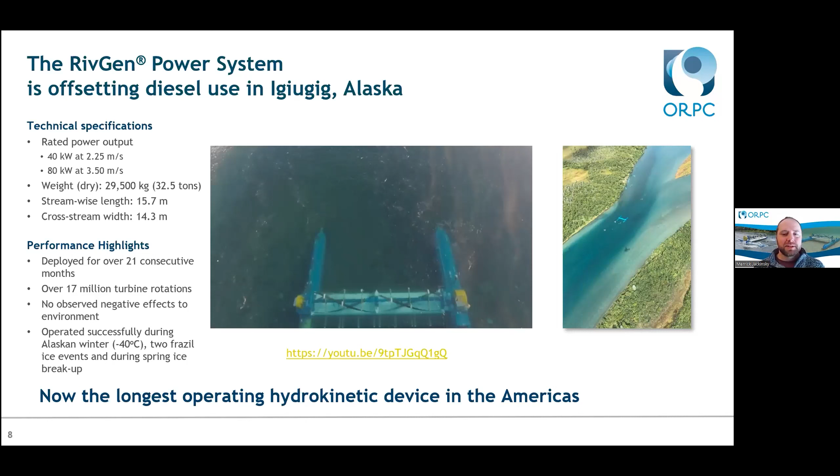We also worked hand in hand with Andy Seitz, who you saw previously in that mid-break presentation. He worked with us on some fish monitoring exercises. There'll be more on that tomorrow, I believe, when Iggy Village President AlexAnna Salmon presents about some of the environmental impacts of this device.

So why hydrokinetics? One of the big advantages is base load power. From previous presentations, you may have seen there are predictable curves, predictable amounts of power generated year round. With this modeling effort, if you're in a tidal environment, you can look into a tide book and see what your power production will be in that area. In a riverine environment, you can look at previous years' histories and have a predicted model of what will come out of the river.

Our device is a little different than the ones mentioned in Ben's and Eloise's presentations. Ours is underwater, completely submerged. It's on top of the water for the initial deployment, but once it's done, it's completely underwater. This mainly helps with winter operations, where we can avoid some ice buildup. We do have frazil ice events, which are a different animal in and of itself, but so far that's been a non-issue. The other advantageous thing is it's silent operating — you don't hear the device when it's underwater. It's very appealing to have in a neighborhood.

The biggest takeaway from this slide, I know there are a lot of words here, is that over the 20-year lifespan of a RivGen, we expect to see a 98% reduction in emissions from a village that has one installed. This accounts for winter operations, summer operations, and our maintenance cycle as well. What we're driving for really helps the green solution for the transition from diesel into renewables. Partnering this with other renewables, especially a smart microgrid, is a really advantageous solution for the future of Alaska. That's what we're hoping to roll out with our commercial product, the RivGen.

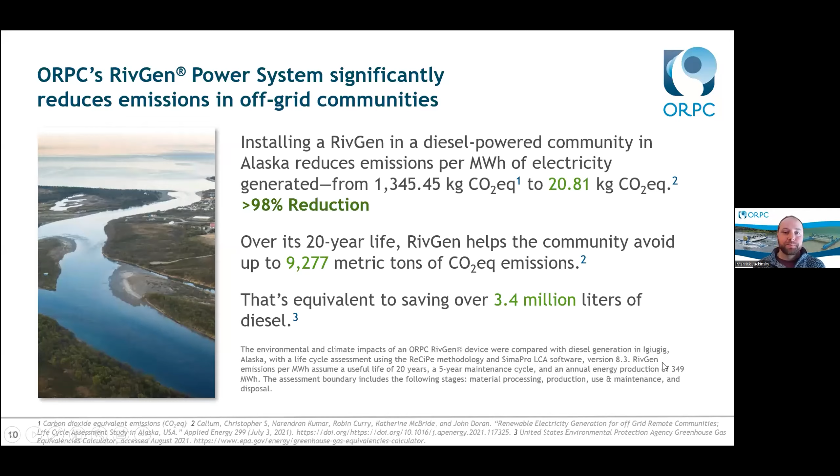So briefly on Iggy — right now diesel is flown into the village. There are a few other places in Alaska that have that as well. The plane actually can't take off unless it's able to offload its fuel, which makes for an unfortunate situation where they have to be low enough on fuel to take the entire load from the plane.

The high cost is a really important point — 5 to 10 times the price paid by an average American or Canadian citizen. The diesels, as Eloise pointed out in her slides as well, are just a very high cost burden to operate these machines.

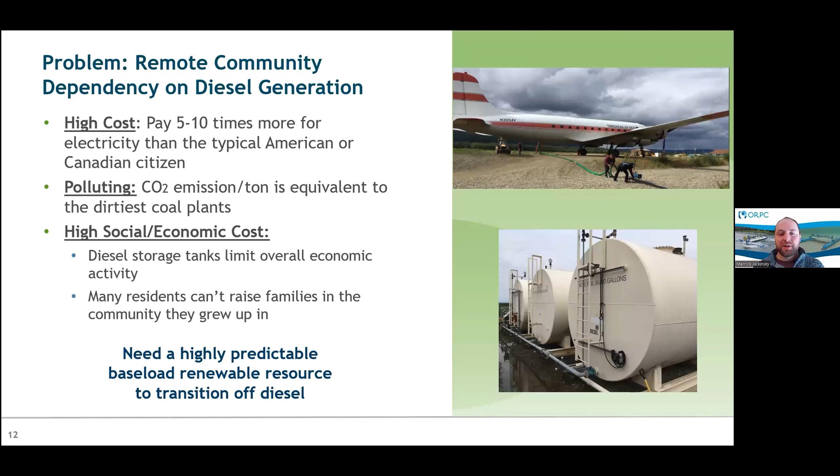So where is our site? For those familiar with Alaska, this is Lake Iliamna on the left, and our device is at the headwaters of the Kvichak River. More specifically, you can see the village of Iggy here on the right, the airstrip there, and our device is a little further downstream, fairly close to the mouth of the river. We're behind that little island, which makes for a nice confluence of currents.

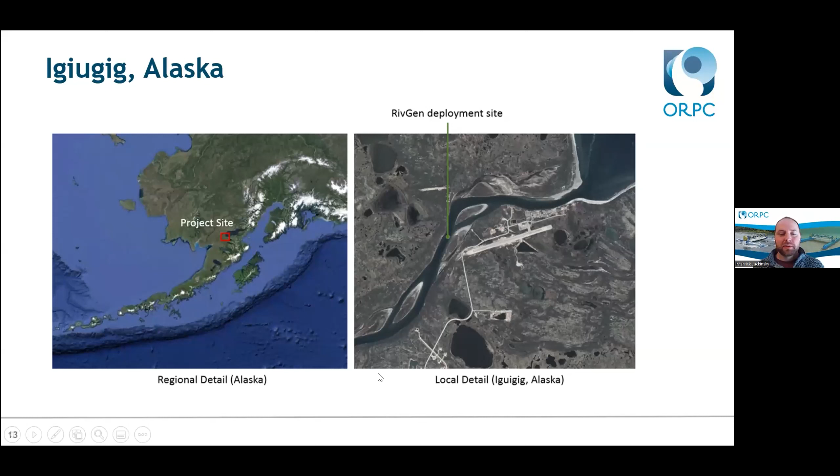There was a question earlier about working with the local populace, and this is something we definitely strive for with ORPC. We're not experts at driving boats or expert welders, but the people who live in the villages of Alaska are. There's a lot of local knowledge base, built up around oil field work and local maintenance, that's been really key to success for projects out there. We believe that's the way it needs to go in the future too — these projects need to be owned and operated by the folks locally, because this is ultimately going to be theirs. We're not going to be pushing this down people's throats, so to speak. That's been a really great partnership with IGIAC, and a really big key to our success.

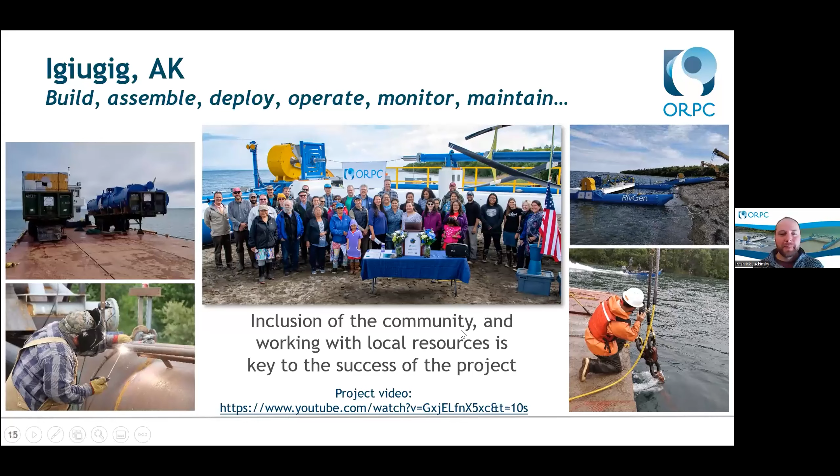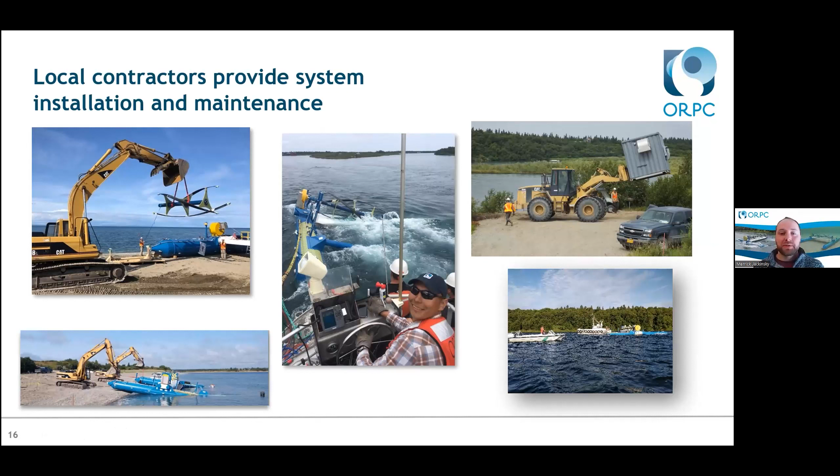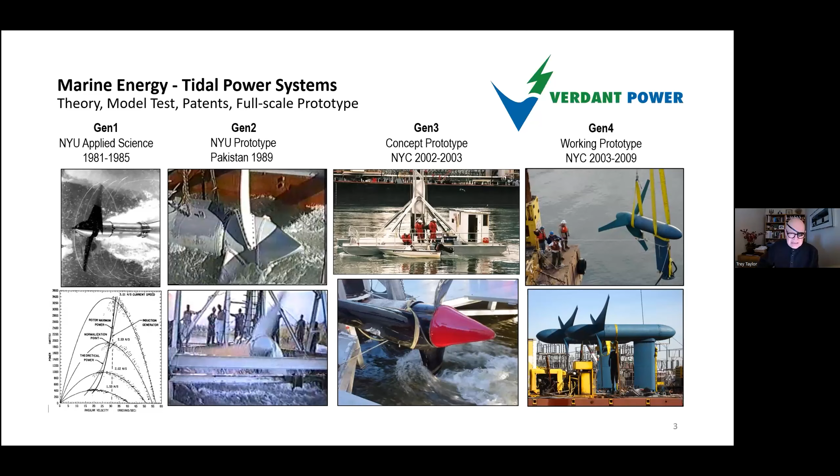And I'll explain what you're seeing here with this slide. So what we've adhered to is something called a technology readiness level, or TRL. And these green, generation 3 and 4, I'll talk about here. So let me explain.

Generation 1 began in 1981, where the basic principles of the technology were observed and reported, and the technology concept was formulated at New York University, then verified at the US Navy's David Taylor Model Basin in Maryland.

Generation 2 is where we started moving toward TRL 3 and 4, around 1985. That's when New York University's analytical and experimental critical functions were worked out, and the characteristic proof of concept was tested in Pakistan, of all places, with the support of the United Nations.

Then DOE came out in 1995 saying, of all the technologies that are out there, this one showed the most promise for commercialization. So with my background from Edison Electric Institute and the National Hydropower Association, I grabbed it to start a company, and that was in 2000.

In 2002, generation 3, we grabbed that report, Verdant Power was formed, and then we moved forward to demonstrate a key subsystem in a relevant environment, providing validation of rotor at full scale in a water test. That's what took us to the RITE project site.

Generation 4, from 2003 to 2009, we began working on technology readiness level 6. This means having a working prototype with full system performance, the first grid-connected array of tidal turbines in the world. That was in January of 2007, operating under a new FERC ruling, which was part of a streamlining of the commercial licensing process, which Verdant Power had a hand in doing.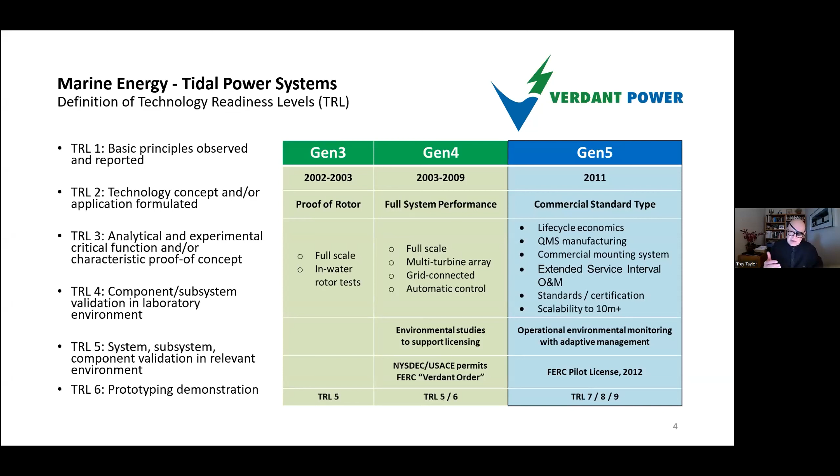The East River is actually a tidal channel connecting Long Island Sound with the Atlantic Ocean. To know more about this project, I encourage you to go to Verdant Power's website, where you'll see an NREL YouTube video of what we've accomplished here, which I'm about to share with you now.

What we've been doing is advancing since 2002 on the RITE project site. This is where we've been working with support from our business partners, the Department of Energy and NYSERDA, on developing a proof of concept. In 2007, we had the first grid-connected array of tidal power turbines in the world, which we call our working prototype.

In order to get that operating, it required approval of 14 resource and environmental agencies requiring 23 permits. We expect the same thing to be going on in Alaska, so we're ready to help you achieve that based on all the studies that we did.

Our FERC license, which was issued to us in 2012, is literally 4 telephone books thick. Volume 2 contains every possible study you can imagine, from sight, birds, fish passing, sound — all of that we have studied on the impacts of our systems on the environment.

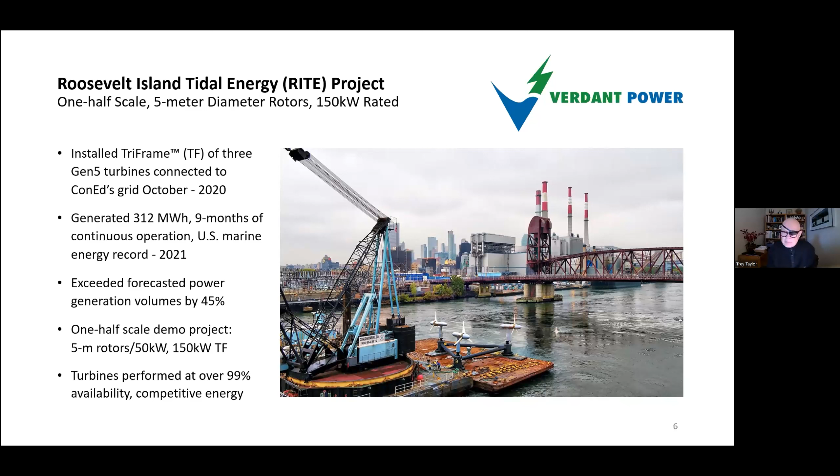What we've done is we have a commercial standard system that's now tailored for ocean currents, tidal currents, and river currents. That's what we refer to as a standard system. It has few moving parts, a fixed pitch constant speed rotor, a passive yaw system. It's readily scaled to a variety of water conditions and currents, like oceans, tides, rivers, even large canals. The Bong Canal in Pakistan is actually deeper and faster than sections of the St. Lawrence River. This system is designed for a 20 to 25 year life with 5-year service intervals, using no divers, no extreme heavy lift vessels. Its overall water to wire efficiency, including all losses, reached over 50%.

With a focus on reliability and affordability, a tri-frame mount is designed to install 3 turbines simultaneously, which helps lower the CapEx and OpEx. When we use the larger systems, each turbine can be popped off and serviced on shore, sort of like changing light bulbs in a candelabra. We're trying to minimize on-water work, so everything is done on shore, swapping these in and out at that time.

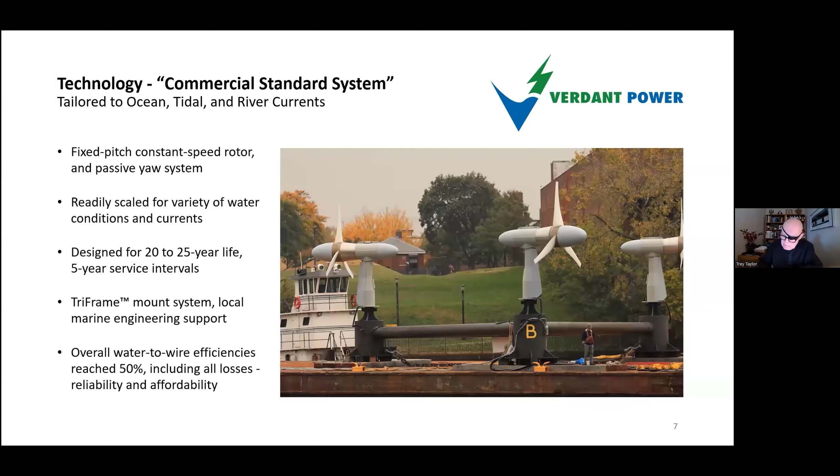One of the things too, let's see, make sure I got this correct.

On this slide 8, this is really important. Something else that we've been able to achieve is we had our system commissioned, and that was the final commercial step in getting through 7 and 8 and all the way to 9—having a commercial step is operating over a range of conditions to advance through those TRL steps, whereas the actual system has been completed and qualified through test and demonstration.

By focusing on maximizing the system power performance, increasing availability and reliability, and reducing project cost, which includes installation of in-water instrumentation to measure water velocity, acceptance testing of the SCADA system, which is the supervisory control and data acquisition, and undergoing a power performance assessment by the European Marine Energy Center. So that's what's gone on. That's what we did at RITE.

EMEC, the European Marine Energy Center, is the first marine energy test laboratory to have been designated with Renewable Energy Testing Laboratory, or RETL status, by the International Electrotechnical Commission, or the IEC. Verdant's tidal power turbines are the first in the world to be assessed by EMEC as an RETL, and have received international recognition from the Renewable Energy Test Report, verifying compliance with formulated international standards. No other company has achieved that in marine energy. Verdant Power has. This will serve to underscore buyer, financial, and insurance confidence in Verdant Power's systems.

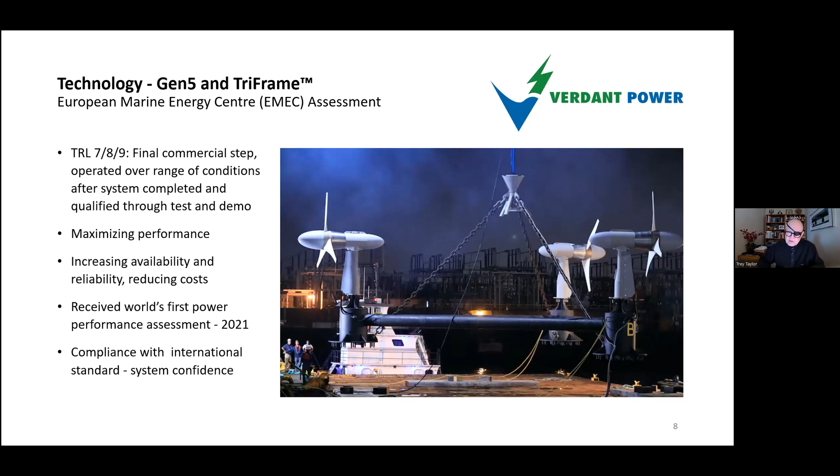So what we have is the world's first third-party measurement to IEC standards. Where Verdant Power is now, we're underway with a new financial raise for the company, where we'll be scaling from that half-scale 5-meter rotor to 12 and 18-meter size rotors, which we call the 18-meter class system. This will be our Gen 6 turbine. We're advancing to full commercialization. We're hiring staff, and we'll be establishing international supply chains.

That will take us to—I mentioned the RITE project being one—we have 4 other projects now shaping up, 2 of them in the UK and Wales, and 2 in the United States, 1 being Alaska. So I'm working up toward Alaska here, how we get there. On all of these sites, what's really required is doing what we call a resource assessment and feasibility analysis, or RAFA, out of which then comes a business plan for execution.

That's how the earlier panel was talking about how you track money. It's really putting together the financial models for each project and the LCOE for not only the technology, but for the project itself. And that's how you begin to put together a business plan for developing a project.

So let me talk about these four projects and how we get there.

Let me first begin with a project we're going to be doing in Wales at a place called Ramsey Sound. We're taking our 5-meter diameter rotor that ran successfully in New York, refurbishing it, and shipping it over to a company in Wales. They'll be installing it on a system near Pembrokeshire in Wales, where they already have the consents and the mounting system in place. It will operate and deliver power there for several months, installed on a ready-made mount, so we don't have to worry about installations because all the consents are already in place.

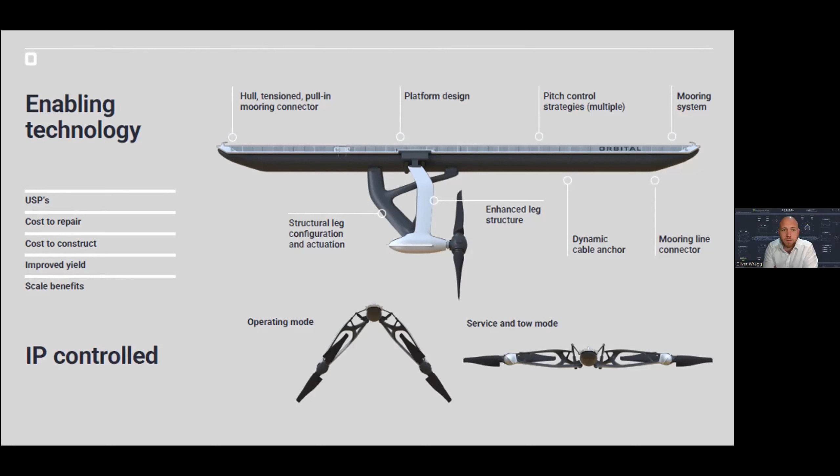That's really what the company's been working at. As Trey said, the past 20 years or so that Verdant have been at it, I can definitely purport that that's the amount of time it takes to develop some of this stuff. Orbital's been at this for over 15 years. I think the first grid connected machine the company had was actually whilst I was working at the European Marine Energy Centre, and that was a 250 kilowatt floating platform.

As I said, that followed in the wake of a previous 250 kilowatt machine that had then been from previous deployments as well. Over the course of a 12-month period, this machine produced over 3.2 gigawatt hours to the UK grid. So this was really, I suppose, a full-scale demonstrator, as we termed it, at commercial scale.

It really hit and broke down quite a number of barriers in terms of the amount of power produced from a single machine. At points, it was actually reaching 25% of Orkney's electricity demand, which is a group of islands of about 20,000 inhabitants off the north of Scotland.

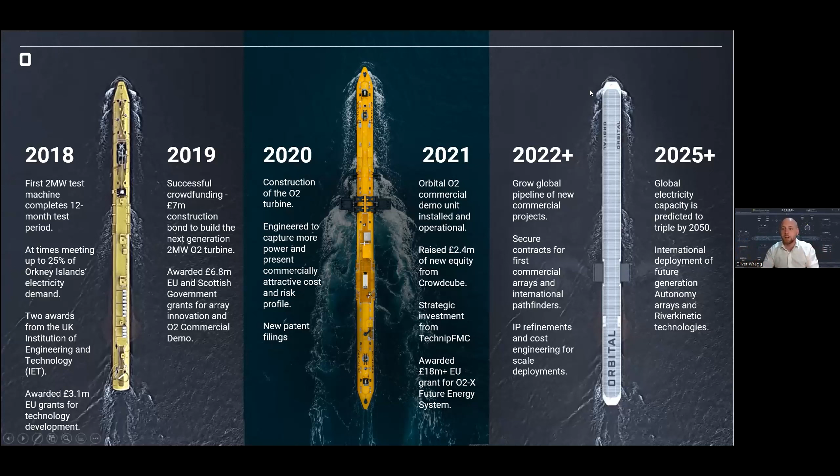We'll be looking to secure contracts for some of our first commercial arrays, mostly in the UK, and again very aligned as Trey has his finger on the pulse in the UK. We're looking at some of the projects in the UK as well. And beyond 2022, we're looking at that wider kind of expansion and securing additional projects and locations. But a bit about the technology and why it looks so radically different.

The first bit is pretty much looking at construction and repair, and it's focused on levelized cost of energy — the cost to repair. Basically we can just get the guys out on a boat, they can jump onto the turbines, fix them pretty quickly, if not quicker than you can on a wind turbine, because a lot of tidal resources are closer to shore than offshore wind. So the cost and time to repair is a lot cheaper, and also the cost to construct is a lot cheaper.

Bearing in mind, as Trace mentioned, with some of the turbines they're looking at, they've got the ability to use smaller vessels. As you scale up larger turbines, you get heavier, you need bigger cranes. But by having a floating system, we're able to scale up to have larger turbines while avoiding these large vessels. Now, the other point that's incredibly important is the operational benefits that we have.

I was really pleased to see some of the slides that Levi put up earlier. We've highlighted specifically the issue with turbulence. So that 10% turbulence, you can keep within that with maybe about 30-40 meters of water depth here. This is a fundamental principle we play to our advantage, because the water moving at the bottom of the water column has higher turbulence there, but also moves slower. So it's a bit like in wind energy, you need to get turbines high enough so they punch through the wind envelope, as they say.

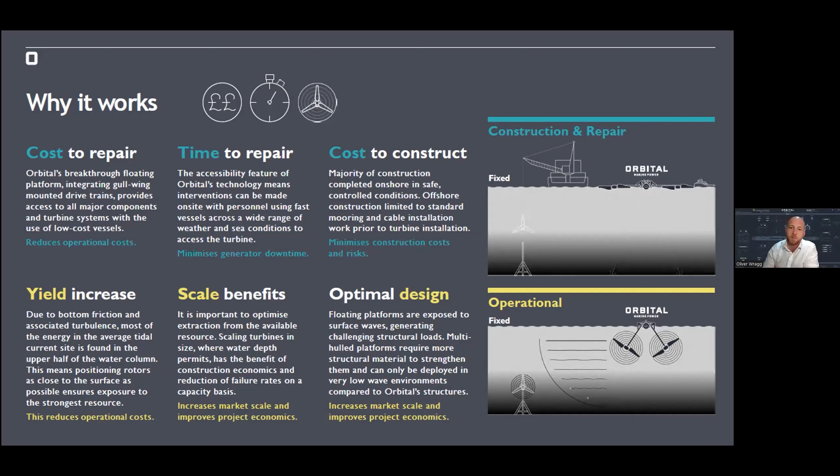And we're placing our turbines in the optimum resource possible. So it's a fast flowing resource, and it's the most laminar. We're avoiding all of that turbulence. At that scale, we're increasing the yield and getting maximum swept area. So those are the fundamentals that have driven a lot of this concept for this piece of engineering that you can see at the moment.

And just quickly, in terms of the SR2000 and what we achieved with that, over the course of the year, it was 3 gigawatt hours. It produced a really good constant supply of electricity at just under 25% operational capacity factor for the machine over the course of the entire year. And that's taking into account all of the downtime that we had.

Now, one of the things that we look at is we accept that to increase our performance and our yield, we're going to have to access the machines for maintenance.

Much like, there's no wind turbines at the moment that you can install and leave to run for 5 years. You have to have annual maintenance. We believe that putting that maintenance strategy in place is the right approach for tidal energy.

Again, the point is, if you had a large 2 megawatt system on the bottom of the seabed, you've got to wait for a longer weather window. You've probably got to wait for neap tides, so you have bigger slack tides to access the machine. You've got to account for any exposed sites, the wave regime, and so on and so forth.

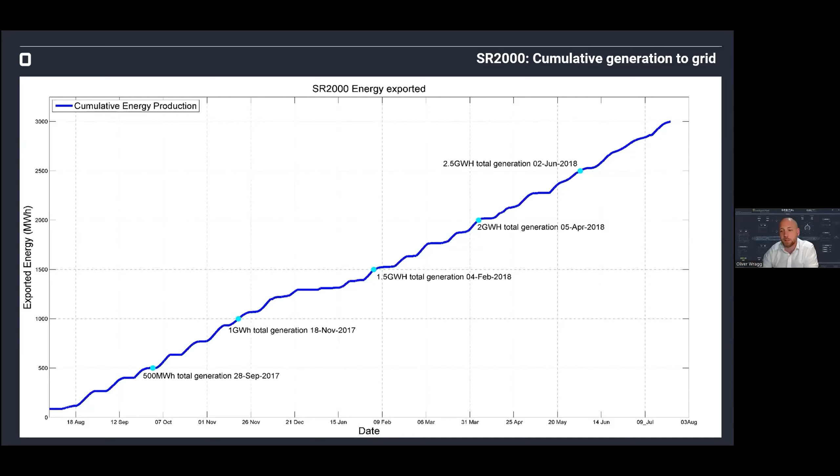So we've been able to address some of those, and we've got some really positive power production figures off of the SR2000. But as I said, we've moved on from that now, and we're on to the O2. This machine produced first power to the UK grid in July 2021.

We've been working through some of those big steps between the SR2000 and the O2, specifically looking at control systems and pitching blades, and tracking the power production from the machine against what we predicted with those predicted power curves, looking at all of those sorts of things.

So basically running it through a commissioning process at the moment, which I'm very happy to report is going incredibly well. For the system, we've hit peak power output at 2.2 megawatts.

The most power we've had from a single flood or ebb tide has been 7 megawatt hours, and the most power we've produced in a day has been 26 megawatt hours. So we're hitting over 50% capacity factors at spring tides here.

We're collating all of this data at the moment, and we're looking forward to reporting soon on that wider piece, looking at the production of the machine over monthly cycles, so we can inform people about that and look at not just weekly capacity factors, but bring that out and provide more information to people.

As a whole, I think it's really important for the tidal energy sector, as Levi was saying earlier, in terms of our stages of development, seeing is believing, and numbers speak. I think it's important that people keep publishing this kind of data, so that companies can understand there are some technologies out there that are progressing very well.

Now, one of the other things I wanted to talk about, a bit of the elephant in the room with tidal energy, is cost. Where are we at on cost? How much does it cost at the moment? Where are you going to get your cost reductions from, and how are you going to get there? Again, it's much better to be upfront and look at these things.

As I said, we've addressed a lot of the fundamental innovation with the O2, and what we're moving on to now with the O2 system in the water is a process of incremental innovation. This is a critical part, because this is where you get to really drive down the cost of energy, where you've got a system, you know it works, you know the fundamental hydrodynamics work, and you know the power is being produced from it.

Okay, right, let's work on optimizing this.

We've got a product now that is commercially viable, but we can make it better. Like we've seen in offshore wind, the guys in offshore wind have, you know, to the untrained eye, from a distance, or put it in perspective, a 1 megawatt wind turbine or a 10 megawatt wind turbine, it's a stick with 3 blades on the end of it. But there's been a lot of innovation to get to that point and changing cost reduction. What we're going to see here is basically a similar sort of system for the orbital technology, where we'll be looking at things like rock bolting anchors, optimized O&M systems, increasing rotor diameters, advancing our pitch control system, blade design, powertrain optimization, and so on and so forth.

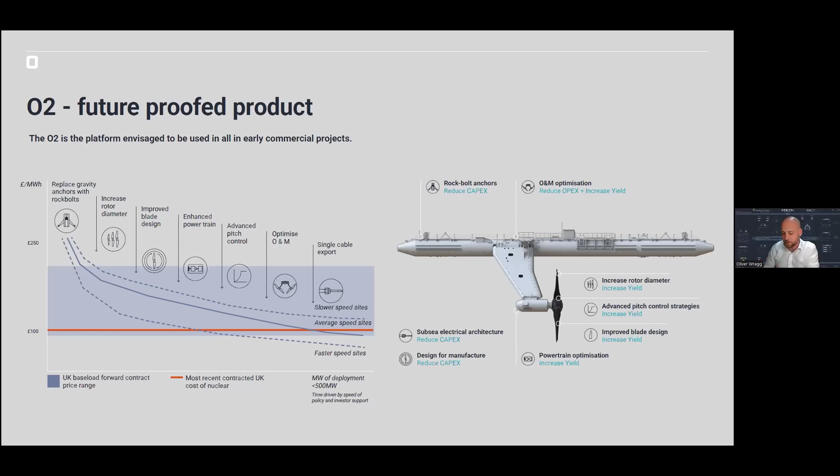And then the question kind of becomes: okay, so at what point do you want to jump on that price curve? We've been working very hard in the UK, and as Trey said, we've got a growing pipeline of close to 100 megawatts of projects in the UK that we're working to. So we're very keen to look at what happens in Alaska and at what point the entry point is there. Is it, go and deploy 500 megawatts somewhere else and come back to us in 15, 20 years time, or is it, okay, well, actually, let's accept that maybe there's some more learning to be done, looking at the Cook Inlet resource, and maybe it's a smaller project at a slightly higher price that gets subsidized in some way or something like that. There's options to look at this.

In terms of our technology development, in terms of what it looks like in the energy system of the future, and I said I'd talk about this a bit earlier: the EU grant funded project that we have, Forward 2030, is developing the O2X turbine. That should go in the water in 2024, so we'll be awarding contracts for that middle of this year. There'll be more pictures of us cutting steel and so forth, all that good stuff that we should be doing as turbine developers, hopefully by the end of this year, which we think is great momentum, having had the O2 just deployed last year, and then within a year's time, we've already contracted the next machine to move forward.

That's going to be installed up at the European Marine Energy Centre alongside the O2. That will create a 4 megawatt plus array that we'll be seeing in there, producing in excess of 10 gigawatt hours of electricity a year.

Now the really interesting bit comes with that. Obviously for us as tidal turbine developers, this bit in the water is very interesting. But for a lot of other people looking at the energy transition as a whole, what's happening onshore is equally as interesting, because at the substation that EMEC use, there's also a constrained community wind turbine, and the grid on Orkney as a whole is constrained.

There's too much wind energy being produced there. So what EMEC also have is a vanadium flow cell battery, which is being installed this year, and an electrolyzer, which is installed on the site. And so what this enables us to look at is, okay, what's the optimum solution for tidal energy. At what point do we produce to the grid? At what point do we store the electricity? At what point do we produce hydrogen?

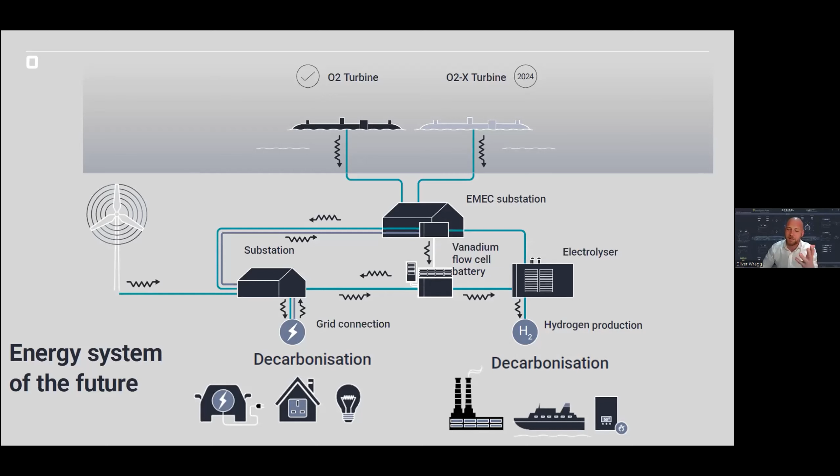But anyway, that enables us to decarbonize both domestic heating systems, but also some of the harder to decarbonize systems, such as heavy industry and also marine transportation.

Last but not least, the final piece for me to throw up is it's all well and good us doing all of this, but we still have to have an eye on what our carbon footprint is for these machines. You think, well, you're producing renewable energy, isn't that enough? And it's not. In Europe we have huge problems now with the amount of wind turbine blades that aren't being recycled. So we've got a keen eye on what our carbon emissions equivalent per kilowatt hour are, and we'll be working to try and drive that down over time as well.

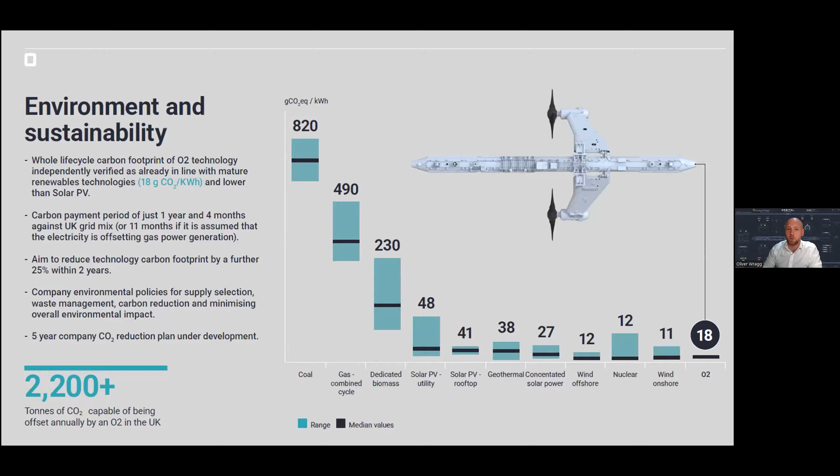So that's a roundup for me, an overview of what we've been up to at Orbital Marine Power. Happy to answer any questions during the Q&A that we've got now, pending that my laptop doesn't blow up on me.

Thank you very much, Oliver. And I think maybe knocking over your water bottle was just demonstrating a new kind of hydrokinetic technology, or maybe making sure everybody was paying attention. But I think one of the two. Yeah, thank you very much. That was a very interesting presentation.

Before we get into some of the questions in the chat, I want to make sure we address Bill Lady's question that came in under Q&A regarding the Inian Islands near Glacier Bay in Southeast Alaska, because I have an answer to that. The Electric Power Research Institute actually did a very nice job of characterizing that resource about 10 or 13 years ago. I have that report and I'd be happy to share that with you, Mr. Lady. And I would mention that Southeast Alaska gets about 95% of its electricity from hydropower, so there's a bit of a challenge there.

In any case, I want to go back to some of the questions in the chat. Let's see, there were a couple early on for Merrick. This one's from Jeremy: Can you provide a timeline for the IBC project? How long did permitting take? When did engagement with the community start? Yeah, good question. So that project started in earnest around 2014.